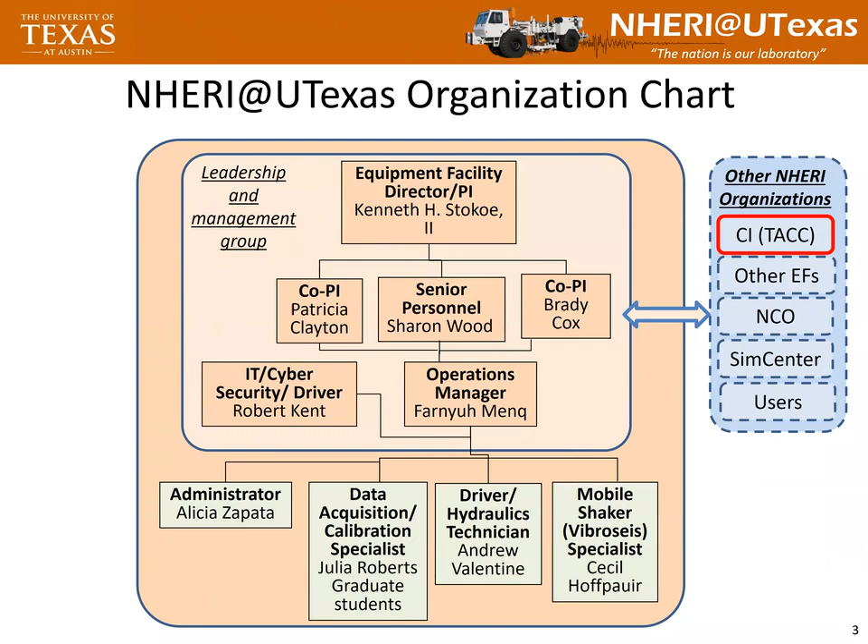I know these slides, but do we really need to talk about them? Do you have anything you want to add there, Farnyuh?

Next please, so this is just to give you a feel. This is our main campus, and this is now called our Pickle campus. Not Heinz 57 Pickles - it's named after Jake Pickle, who was very helpful to the university over his career in the U.S. Congress. We'll leave it at that. That's where we house all of our equipment and build things if we have to, like small sensors that we push in the ground, because we do a lot of that as needed.

It'd be much worse if I were doing that, so let's just be happy here. Okay, go ahead and flip to the next one if you can while you're doing that. All right, so at the Pickle campus - you just went through a whole bunch of slides. I'm a fast talker, but not that fast. Okay, so here we go.

As part of NEES, to get started, we were going to build a building, and then the university saw what it would look like, so they gave us a building that in fact looks worse, but it exists. So we refurbished that - this belonged to our structures lab, and they gave us half of building 46 out at the Pickle campus, and you just see some of our equipment there.

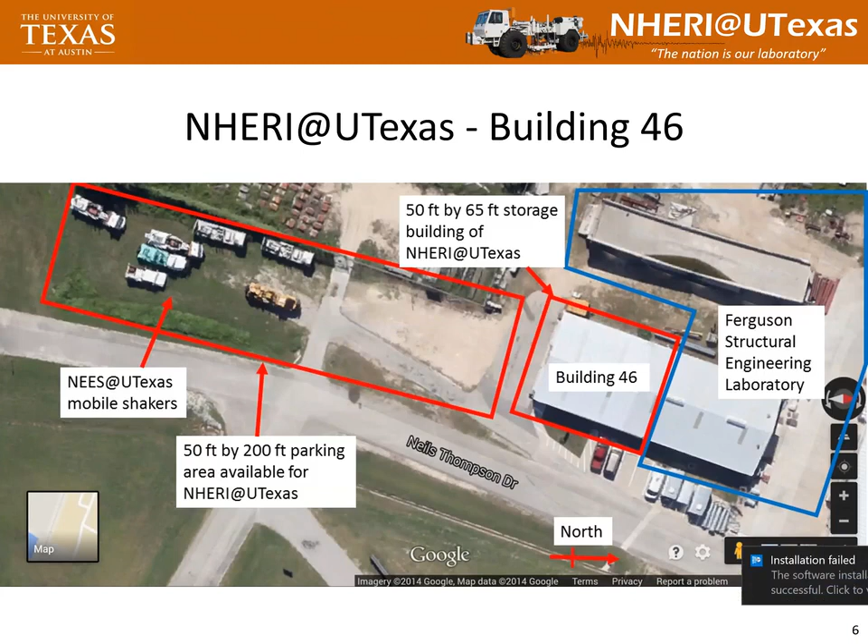That yellowish thing is a different vibe we have for a different purpose. But all of that is ours, and this is paved - much of this is paved now and so forth. It's a very good place, and we have some parking and so forth. Not a big deal, but the university has been good to us in helping us that way.

Next please. Looking into the back of it, there's the RDD, rolling dynamic deflectometer. That's Thumper, and that has to be Liquidator, doesn't it? Unless it's a real old one. It's Liquidator, okay - you'll see what those are in a minute.

Back please - this just shows you a plan view of it. Those are the big doors, and we have lots of space that we've filled up with equipment. This is an air-conditioned one - it's a lock-in container, but this will certainly get to 130 degrees in the summertime.

Here we are at work. That's Cecil, that's Robert - I'm not going to say who's that. I don't know, I know who that is, and I'm not going to say. I took the picture by accident.

But here, all of these things are cables where we built - these are pore pressure transducers. They were 2D, and then we went to 3D with small geophones. You'll see those, built so that we could push them in the ground and shake the ground and measure motions and also pore pressures that might be generated.

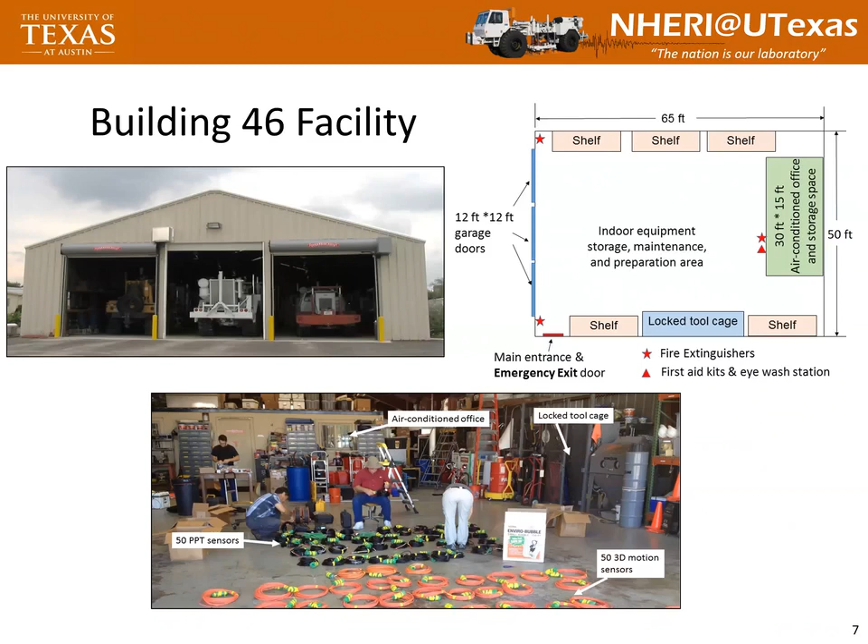Next, so this is what we have to offer you. T-Rex is a triaxial shaker. Everything that's white there holds down that little orange stuff. It was supposed to be burnt orange, but that was the first one made and they gave me a Tennessee orange. But it's too expensive to repaint.

But that's been repainted - how much did it cost, Van, to give? We haven't? Which one have we - I thought Cecil did one. Raptor and Rattler. Okay, I think we repainted one of these, but we won't go there. Okay, but you know, it's all hydraulically operated - there's a big engine in the back to power the pump.

It weighs about 72,000, something like that, 70,000 pounds after new things we put on the back. That's a hydraulic ram that you'll see on the back. Liquidator also has one. There's a ram.

T-Rex, you can push a button and change the mode of vibration. It's probably the only operational triaxial shaker in the world, although the Russians bought 3, but we don't know if they're working anymore. That really makes it very nice when you want to do P and S. You got one machine and it does all of that, P, S and Rayleigh. So that's very helpful that way.

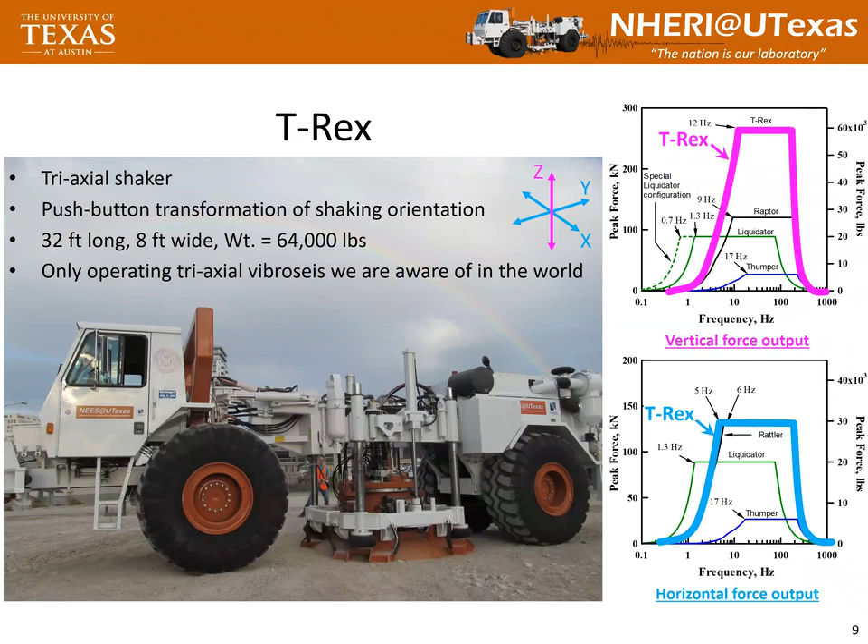Next, this is going to be a video. This shows you T-Rex in New Zealand - this is in Christchurch.

$85,000 to get it there and back. Brady tells me it's a smaller number. It's what, 60,000, roughly 30,000 each way? I like my number better, but okay.

So I misinformed a lot of people. But it went through the Panama Canal, not the Suez Canal - the Panama Canal.

It's impressive when it starts shaking. Brady was using it there to do surface wave testing. In this particular case, we used it for liquefaction.

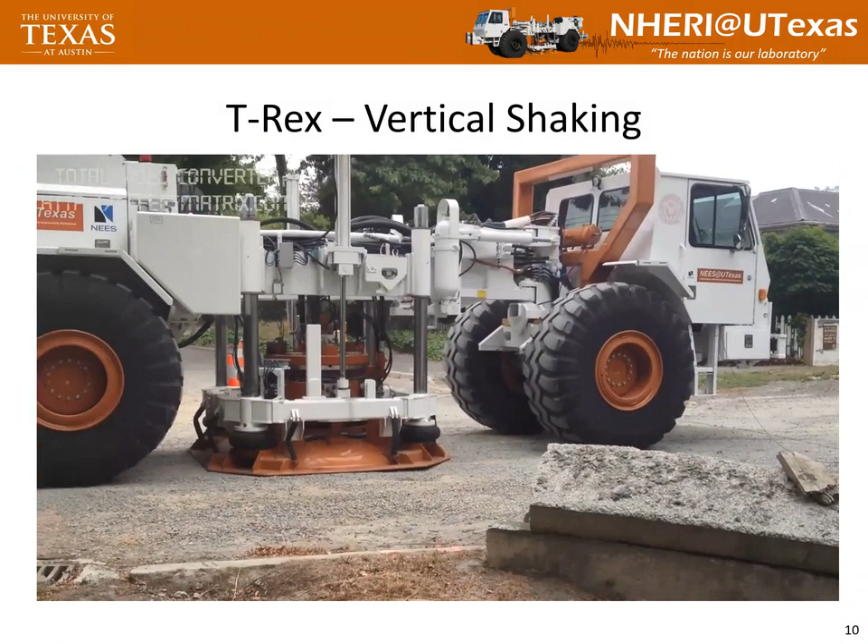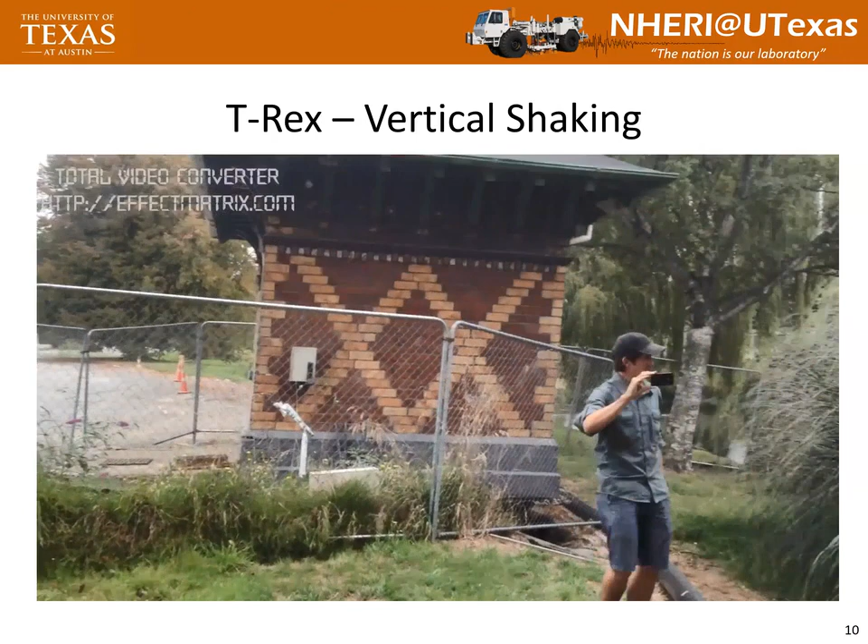There's video with it - it's shaking now. It's hooked up to the internet, so it's determined by how fast the webcast can go. You can see the water going ripples like that - you can see everything is moving around there.

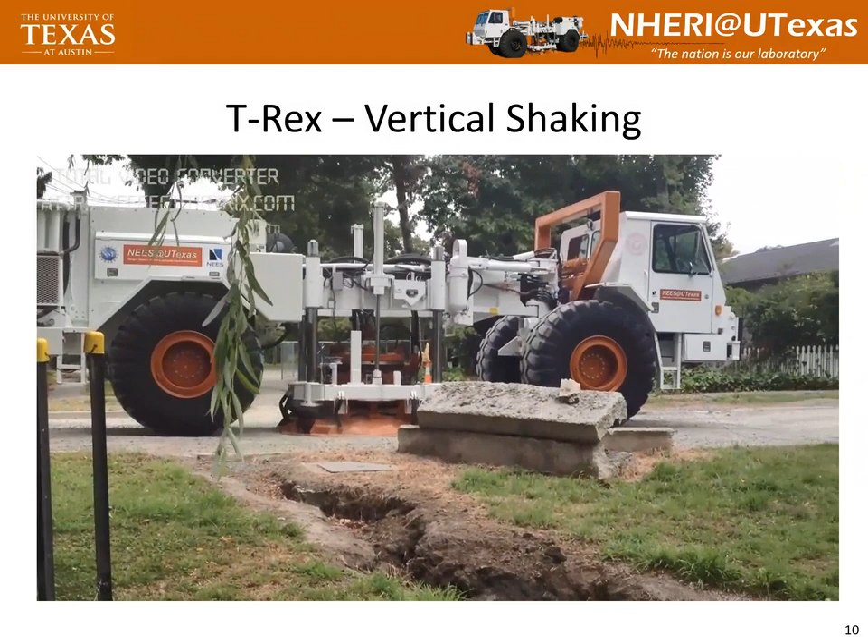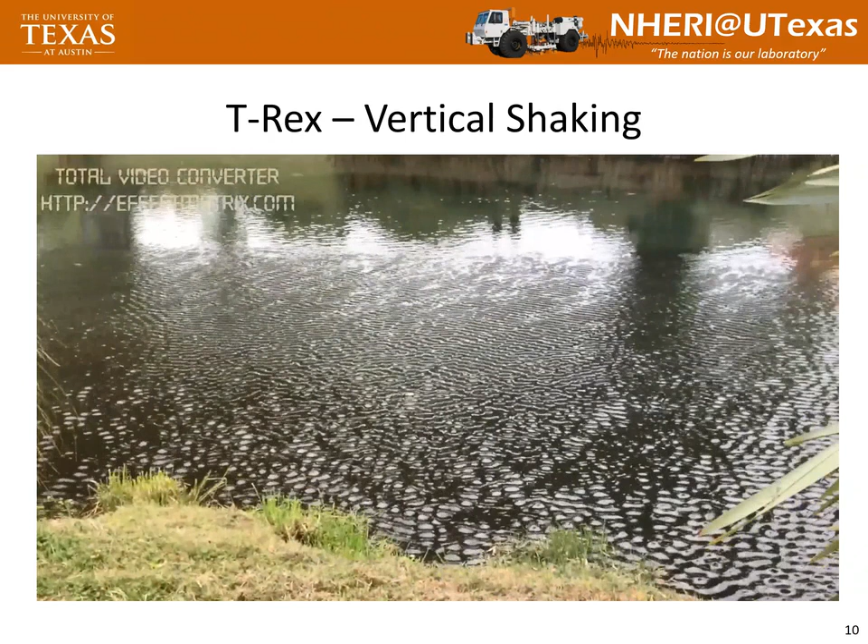There's Robert. I think he goes back again. So we're seeing if we can - yeah, it's impressive when you see what it can do.

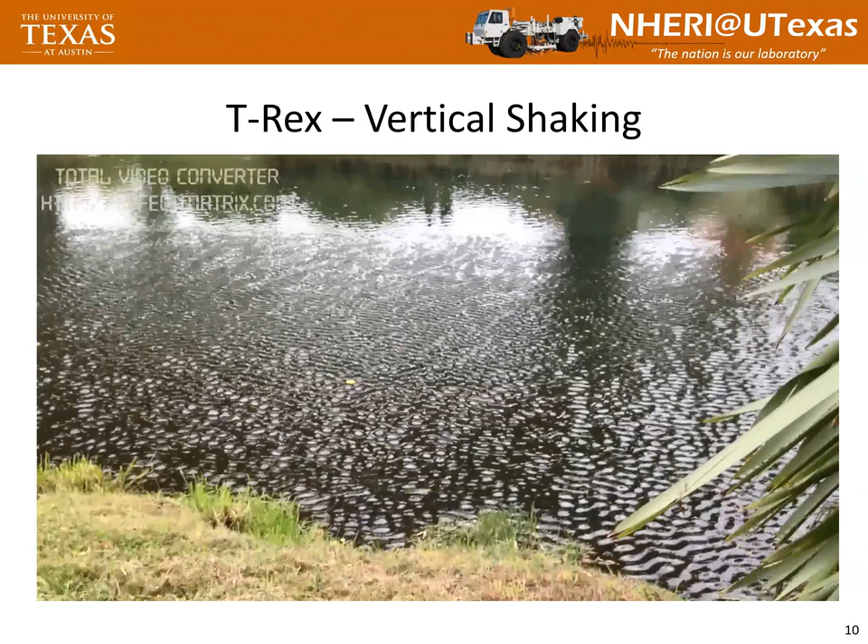We're not putting it on top of a sinkhole. I don't care if you tell me it's a small one or not, just for the record - I'm okay sinking it in a liquefiable deposit, but I'm not having it drop into a sinkhole. Don't you still have some Corvettes in sinkholes here in Kentucky, or did they get them all out? This far north, we don't get them. Okay, good, I'm happy we're here. Tomorrow at our site, most of the sinkholes are pretty small, not those house-sized ones. We'll squeeze Menq down one of them, no problem.

Here's Liquidator on top of Yucca Mountain - but that was T-Rex. Here's Liquidator, it is force limited, not because of the big strokes that it has. So it's got the same output in horizontal and vertical because the machine's heavy enough to hold it in the vertical mode to generate the same force.

What you do see, though, is a special vertical configuration - it couldn't be horizontal, but a special vertical configuration that even takes it down to, do we have it right, Farnyuh? Is it 0.7, more or less? 0.7, 0.6, yeah, something like that.

So we generated a 2-mile long wave with that. We didn't realize we could, so we didn't have our sensors out far enough, and we didn't get a chance to go back and do it again. That's one of those mistakes you regret, but we still got down in excess of 2,000 feet, and we got down to true bedrock on the East Coast - 9,300, 9,500, 9,600 feet per second - and they were so happy.

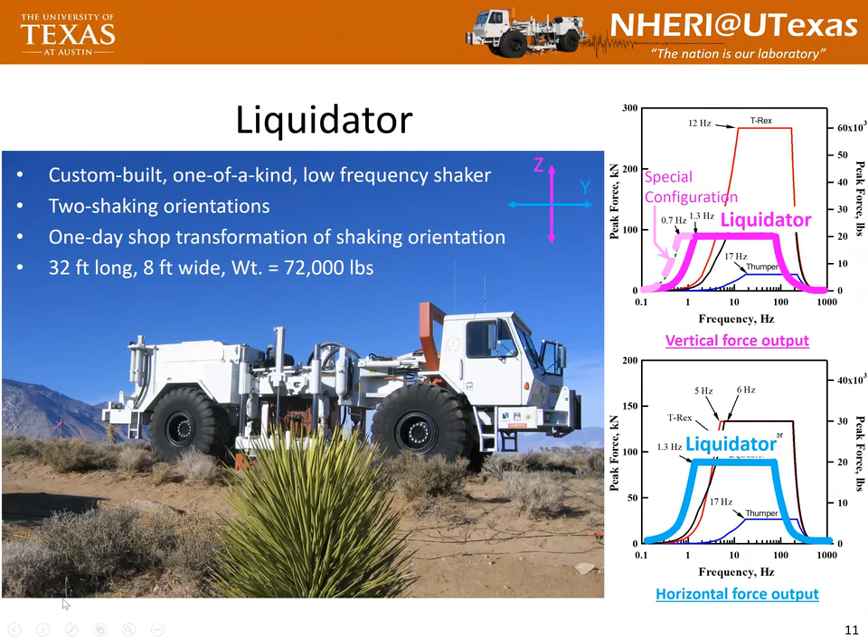Here it is at 1 hertz.

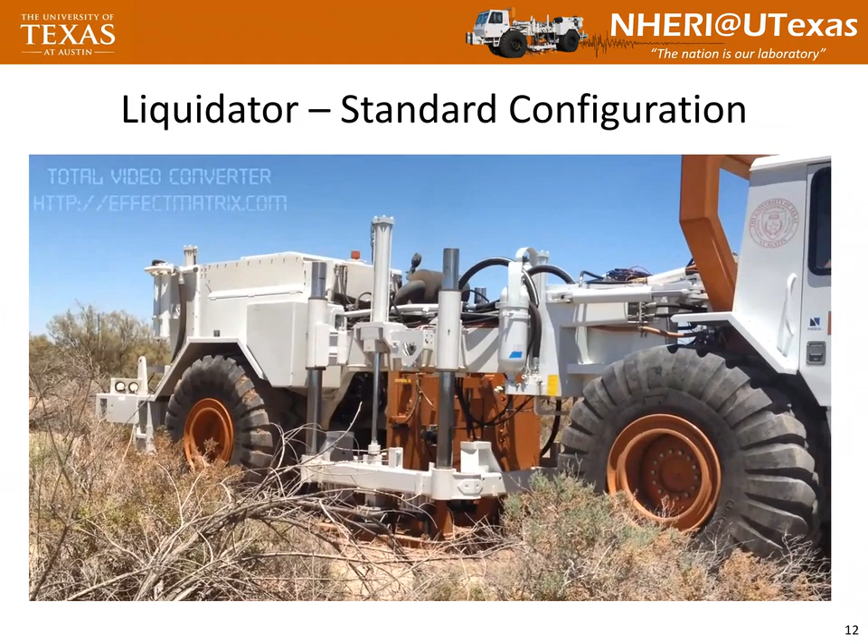Go ahead and hit play, there's going to be a video here that'll show you. It's smooth, but gives you a sense - that's in Imperial Valley of California. It's on the order of 1 hertz, and there the waves would be shorter because it's a much softer soil.

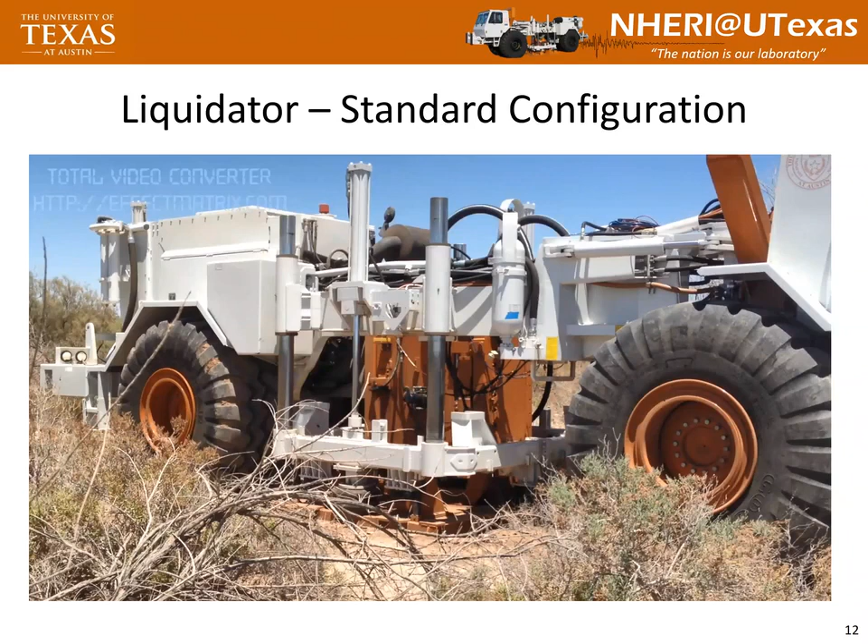So you get a frequency, but you've got the velocity of the soil. In Columbus, Georgia, the soil was much, much stiffer, and the rock is close to the surface. Next, this is a special mode.

Go ahead. Yeah, it's smooth, it's smooth. I don't like this.

So for about 3 years, maybe, I was after Menq. I'm telling him, Dr. Menq, I want to get low frequency. Do we need this? Nah, it'd be huge. Okay, can we do this? And so in the middle of the night, one night, I popped out of bed and wrote down this thought - we'll lift the whole dang body and have the plate not do anything. We have now 55,000 pounds, not 15,000 pounds to lift. So even though it's much slower, we still get good, strong force levels.

Professor Cox was at the same site with us in Columbus, Georgia, and he did his fancy ambient stuff with a mile diameter or 2 mile. Our waves were just as long as his. Now it turns out they agreed, and apparently there's 2 solutions in the seismological area - one says this and one says that - and apparently we're going to debunk one of the solutions, according to Cox. That's as much as I know, but it sounds good to me. And I'm sure there are solutions out there that should be debunked.

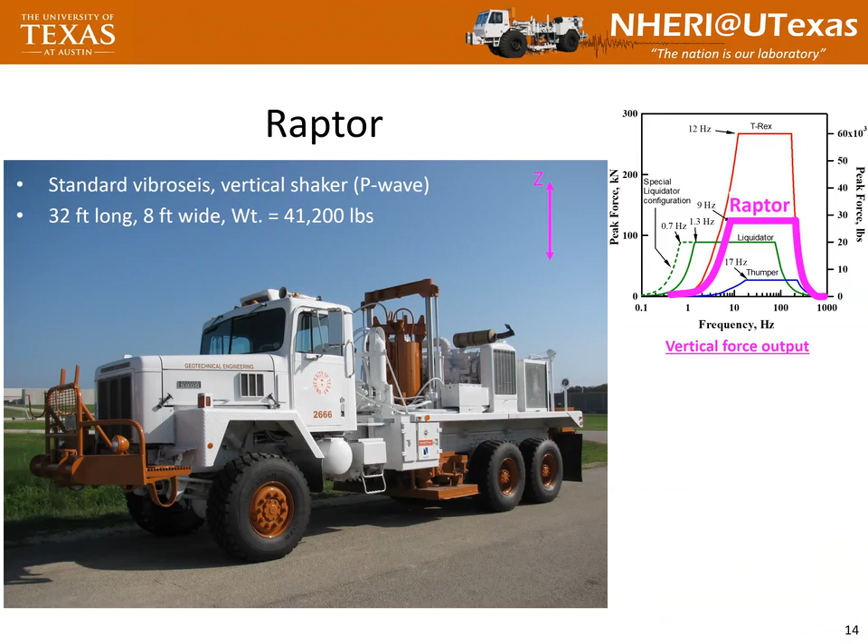And piggybacking - again, all of this data, since it's a funded project, doesn't become available immediately. It's probably a year delay or something like that. But all that data still becomes available, and I'm going to show you, as I already said earlier, some data that's out there that no one has used, and you can see if you have any interest in it.

Thank you. And, you know, Rattler is just a horizontal one. I said that wrong, didn't I? You can correct me when I do that. That's who's going to be out there, because we want two horizontal shaking, and I was doing this, right? But I had this and this. Sorry, I can't do them together.

So there's Rattler. That's what's going to be out there, and we can shake in either a larger area, which gives you more strain, or phase them at different phases together.

Next, Thumper. With Thumper, we just have small amplitude force levels that we can apply. It's on the back here, a little shaking mechanism. You'll see it in another project.

Each one of these shaking mechanisms is built to be taken off—well, not Raptor and Rattler, but the ones that I had built for us—those are constructed so they can be removed from the machine.

Now you'd have to bolt them down or something, and that's a big deal—not trivial. But you can attach them to a structure, and then the machine is still there to power them, and we have a lot of hose. Now you can only have so much hose until you start having a lot of loss in the hose.

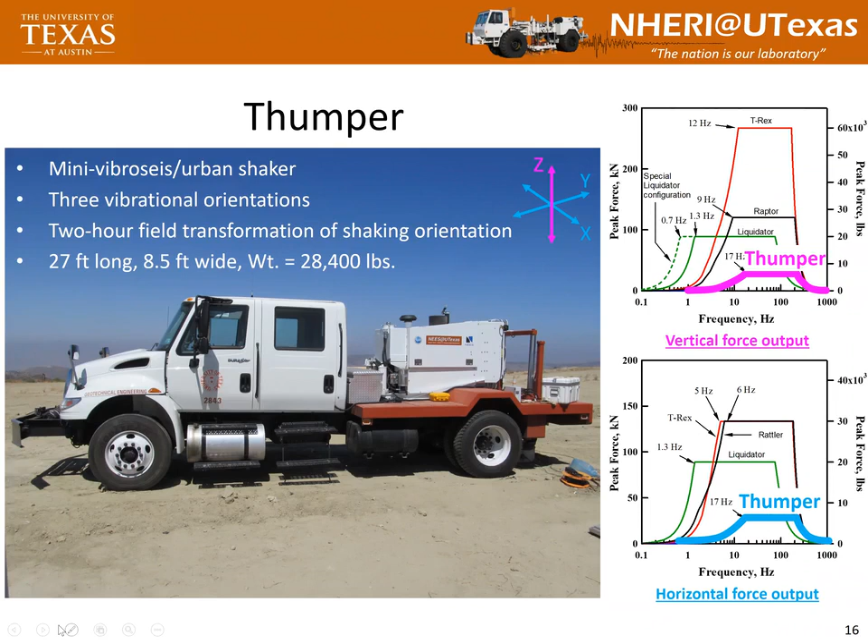Next, please. By the way, if I might interrupt—Thumper, in fact, is the device that's parked in the parking lot right back here. You'll be demonstrating that tomorrow at the site. So, anybody that wants to interrupt at any time, please do.

No, I mean, this is a conversation. It's not meant to be anything but that, to try to help all of us. And that's just a beautiful picture to me—I like a shaker on a 16-wheeler.

It probably is something I didn't even realize that I've dreamt about since I was 6 years old, maybe.

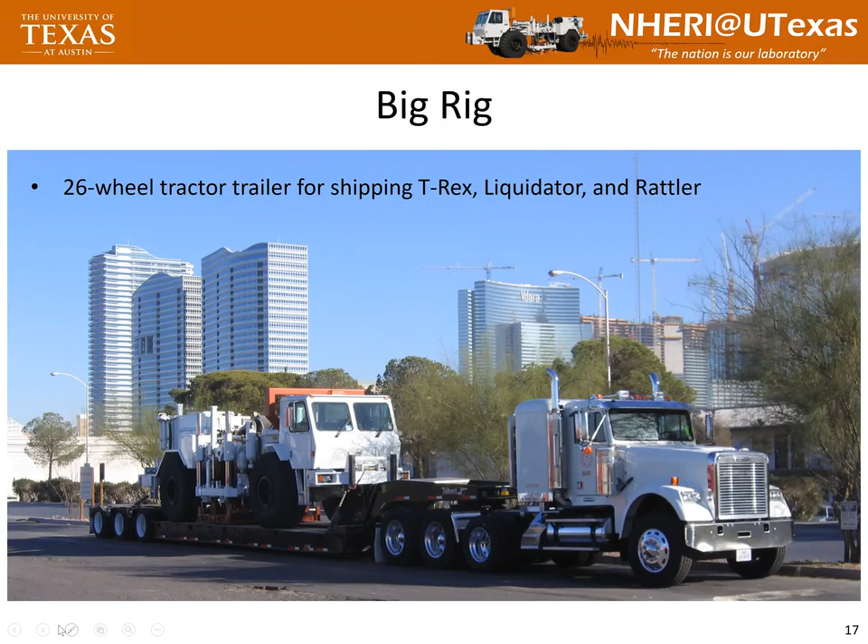Next, please. Again, this is really important to us, that we can send someone off to get fuel while we're still working. Here's a trailer we replaced because the other one was a little too small, blowing tires, or we put too much in it. Doesn't matter which way it goes, we changed it. This one has to be changed now, and that's going to cost us about $65,000, but we think we have program income to do it. Sometimes Dr. Menq answers yes to these, and then I find out later we were maybe a little short, and I'm the responsible party, but we won't go there.

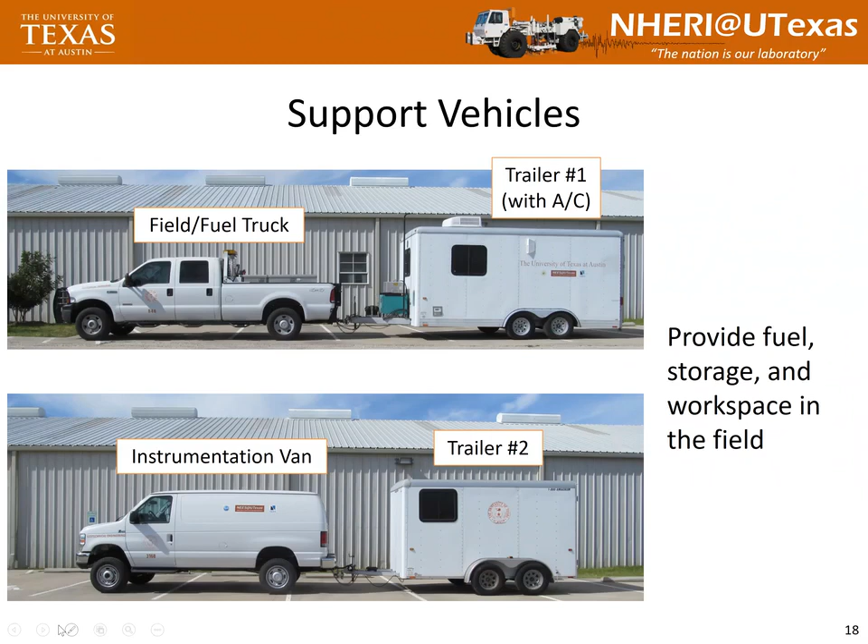We have the instrumentation van too, another small trailer and so forth. Next, there's Professor Cox, younger. In the instrumentation trailer, the one we have now is even a little bit bigger.

Menq can speak to these better than I can. We have a 50 kilohertz sampling rate, 64 channels of this data physics, 24-bit, up to 200 kilohertz sampling rate. I know various folks have tried to replace these with National Instruments, and they can't compete yet. I'm sure someday they will, but this is still first-rate, 136 channels of data acquisition, and that's a big deal.

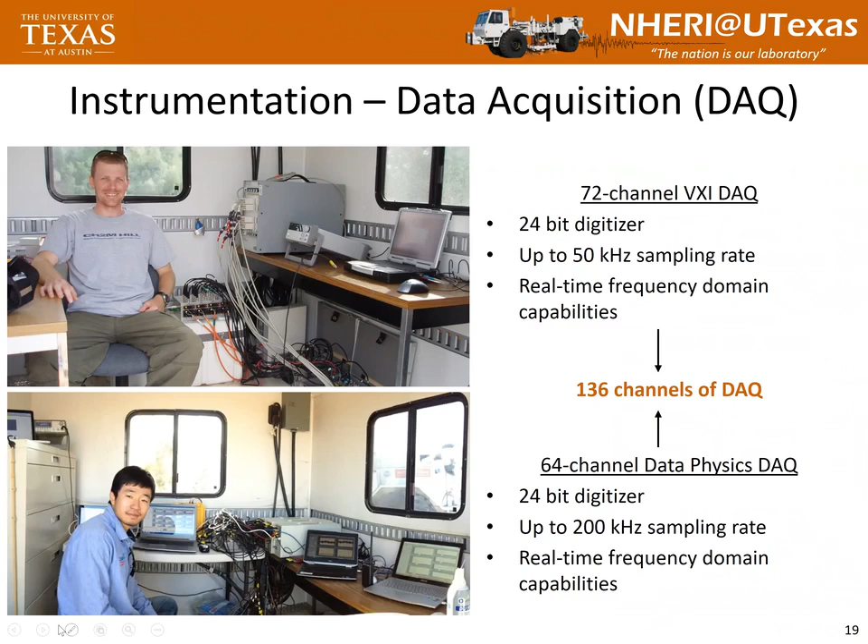Next, we have lots of sensors, 1 hertz because of surface waves and the things we like to do, vertical as well as horizontal. I don't know if you know, they would sell you these as 3-component sensors, and we bought a couple, and it's just not good, let me say it that way. The way they couple them, they have natural frequencies that generate in the system you're recording with. So ours are all separate when we're putting them down.

What you see also, just for the record, let's say we were doing this on pavement, but this is even in soil. That's a little base we've developed, and Ivan Wong and others have given us good ideas, so we're happy to take good ideas. It's spherical shaped, so you can set it on something where you have it, and it's got a nice strong coupling with it. You can feel that, huh? Then you put your sensor in, you get your level, and you can adjust it, and it levels up just like that. Whereas if you're out in the field otherwise, it takes much more time to get the darn things placed and leveled. So that's been very helpful to us.

Obviously, this is Professor Cox, because I don't have all those takeouts, and the cables we develop, we'll have them shielded the whole way.

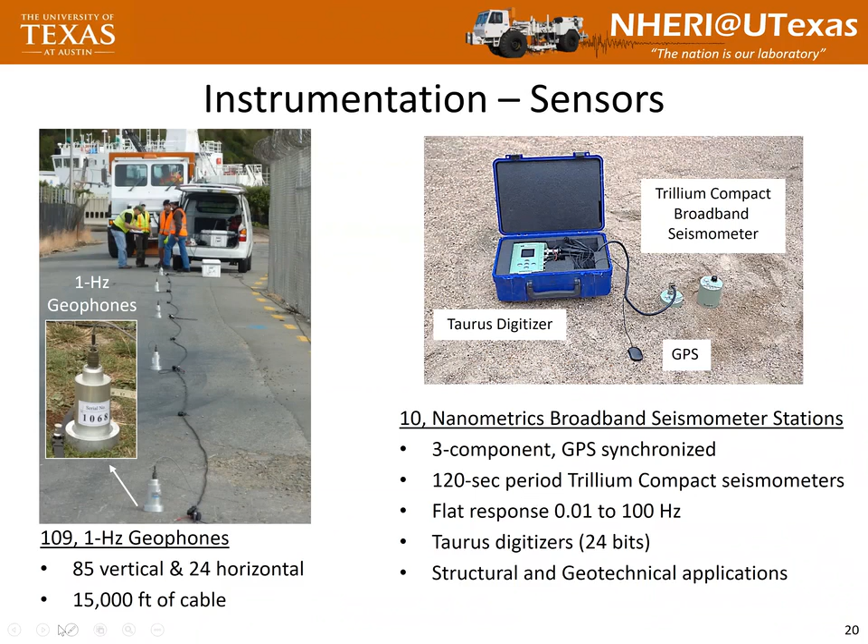Next. Again, we have cone penetration sensors for you. So you talked about those. I think this little one is not going to let you push in just any old place. It won't go in gravel either. But these are a bunch of Fugro cones, pore pressure transducers, things like that.

And I think that cost us about $40,000 or $50,000. 35? Gee, every time I've given numbers, I'm exaggerating, aren't I? That's right, that's right. When I talk to Florida DOT, the numbers are getting bigger.

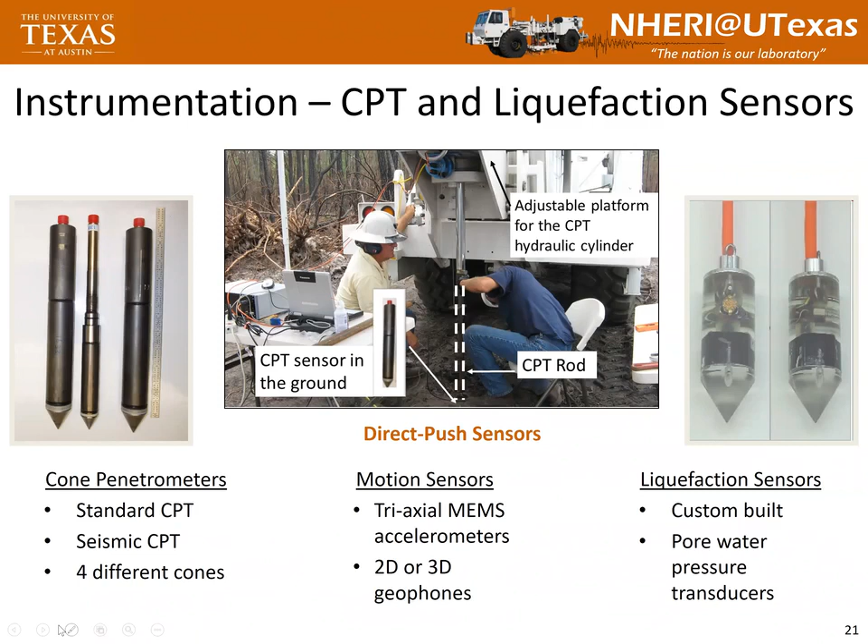One of the very first projects we did was with Simon Klemperer from Stanford. They had all the Texans, as they called them at that point - those were 4.5 hertz phones. That 3D standalone, battery operated equipment, spread out all over the valley, with T-Rex going to shake in different areas.

That data is available too, isn't it? I don't know how good it is. IRIS is really good about helping you, and training you on some of those things too.

They basically have librarians for the data. You're free to say more - you'd be happy borrowing from them, but you need to do it in advance. There's not a pecking order, it's just busy, and you have to see if you can get yours in on time. You just have to work ahead of time, that's all.

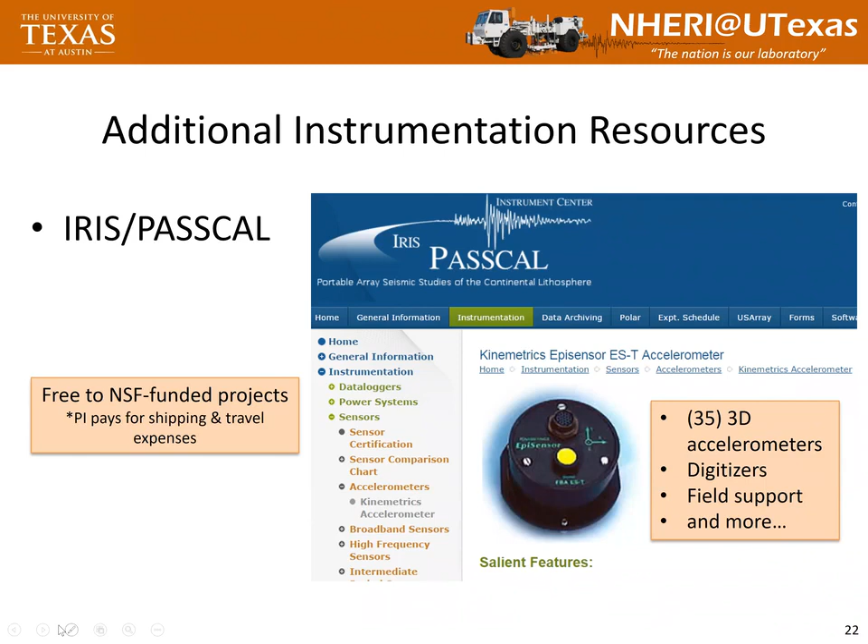And Christchurch, New Zealand - that was really a very special one.

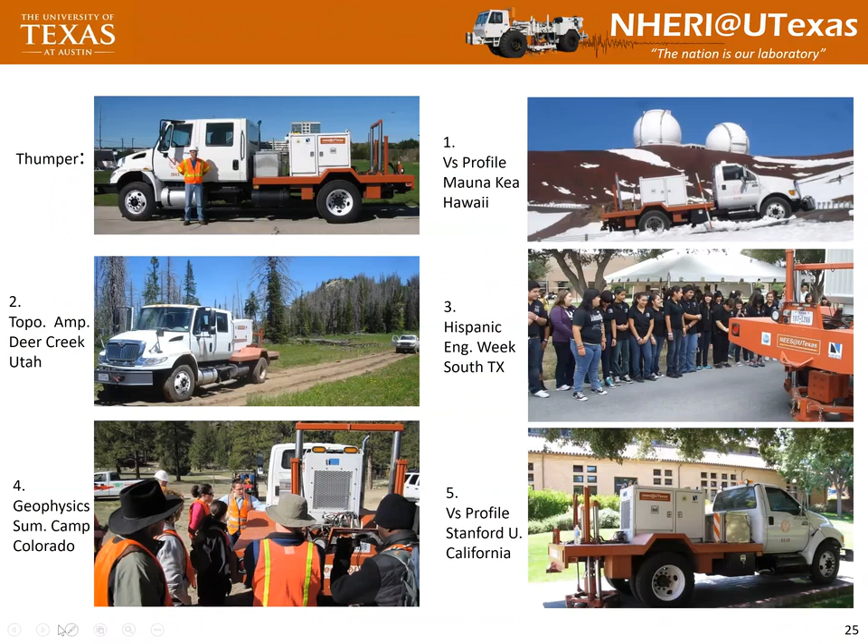And 20 minutes to go, okay. And I really had some interesting things to say there, but whatever.

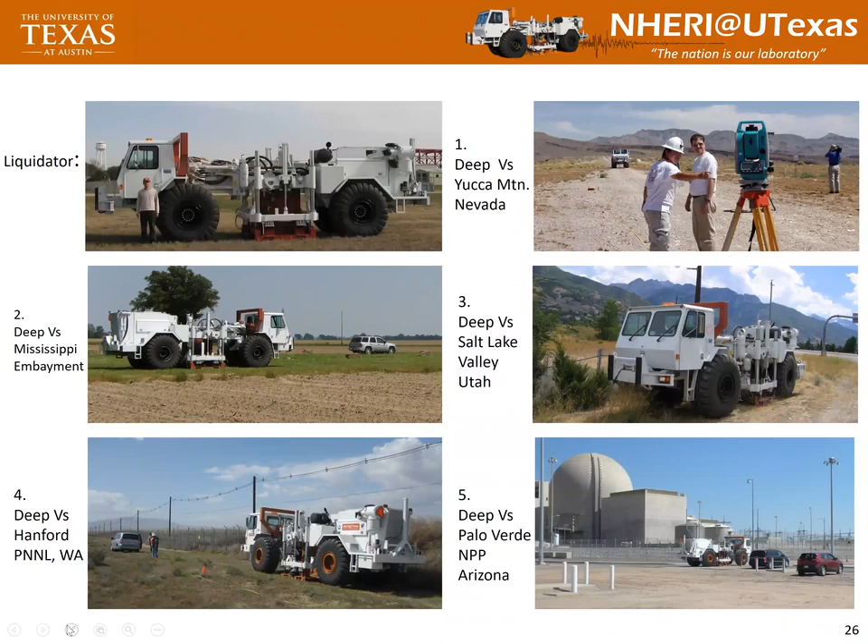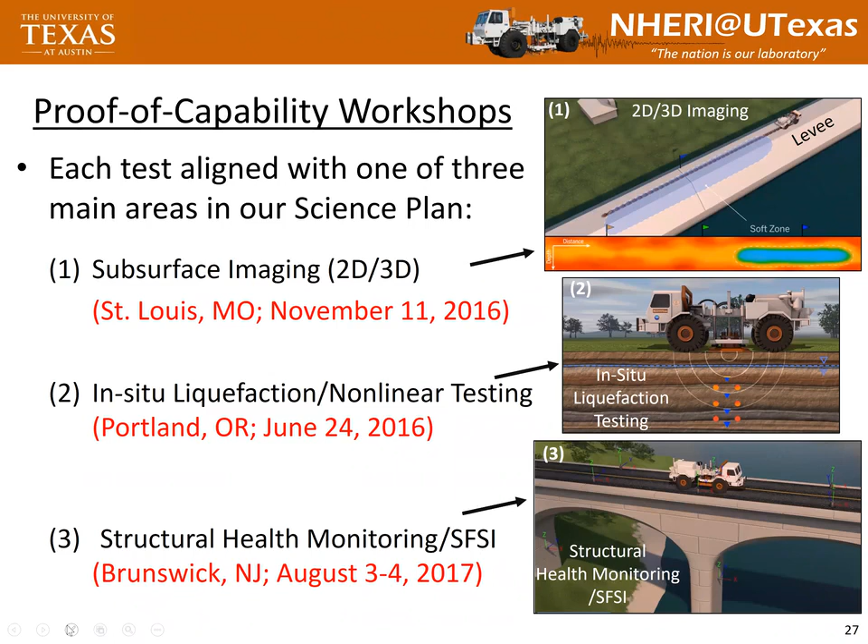This is the proof of capability workshops. We put this in our proposal because if you don't hear about it, you just can't read a little something and get a sense for what's going on. Most people sit behind a desk and don't get out in the field, so you don't have a feel for what you might try to do. We had a very nice liquefaction workshop out in Portland as our first one.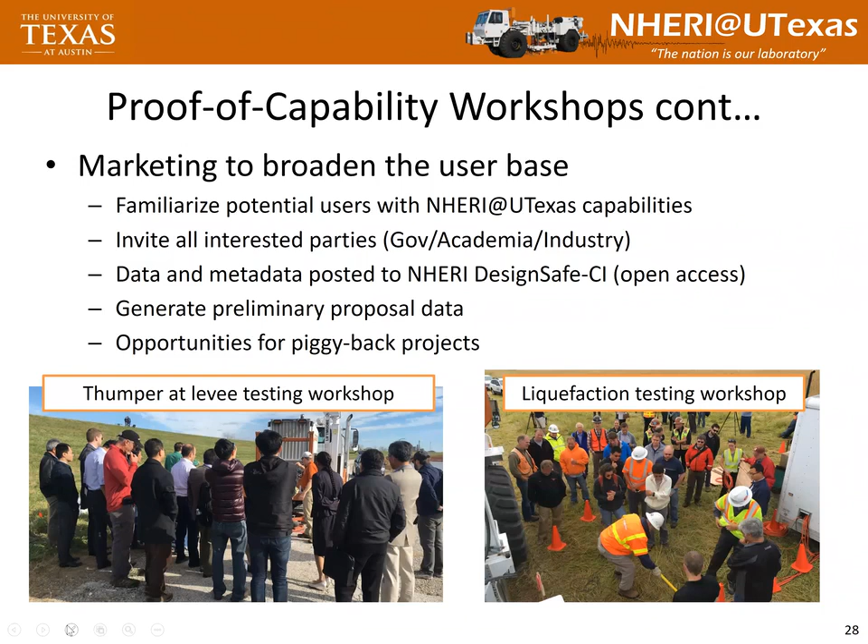In our science plan, that's higher resolution 2 and 3D imaging. We need to do that. Now, that's in the program. That's not us doing it. That's us trying to get things ready so other people can do it and we can work with them.

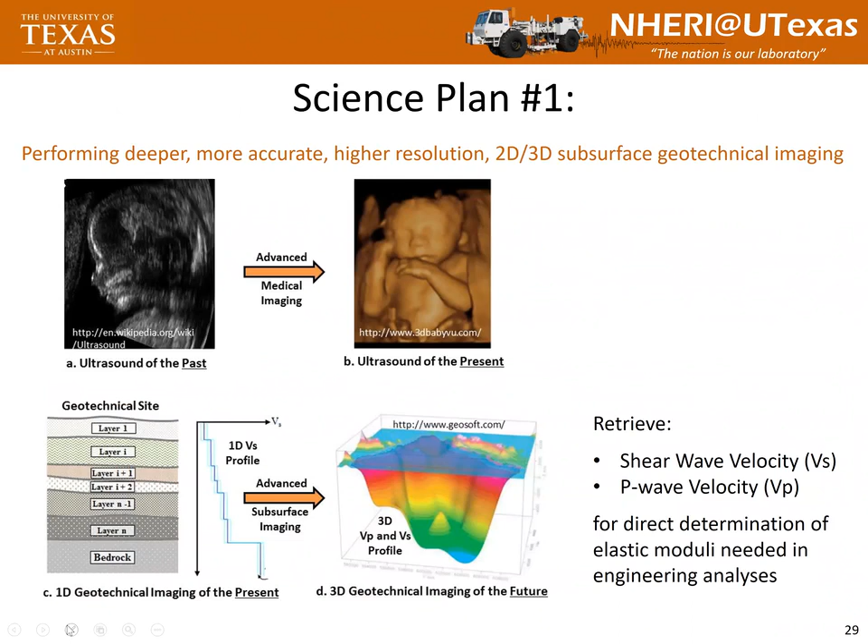This is Brady's work. It was a rapid, so that's a small amount, relatively speaking, $200,000 or less. Then the New Zealanders, for our liquefaction rapid, contributed another $800,000 in the end because it was working so well that they kept going. But this was not known. That period at the site was not known.

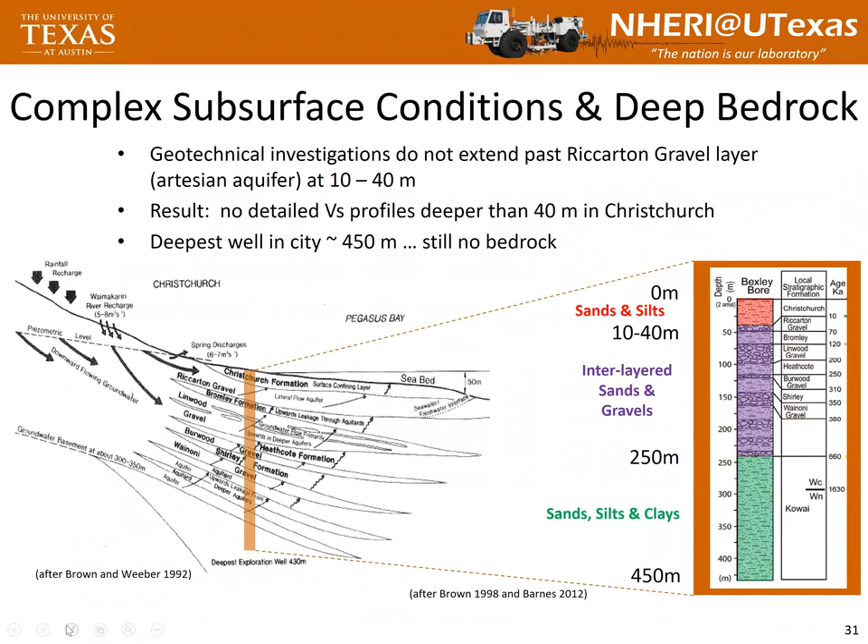Before that time, if you need to correct me, go ahead and jump in anytime. Here's a profile, and they were down in the top 40 meters at most, I think. And the deepest well was 450 meters, and they still didn't run into bedrock.

Brady went down there, took T-Rex. Really, it was both projects that worked to get T-Rex down there, but it was used down there next. One of the big costs was all of the moving time. We were there for a couple months, and just having the truck come and move it from site to site turned out to be really expensive.

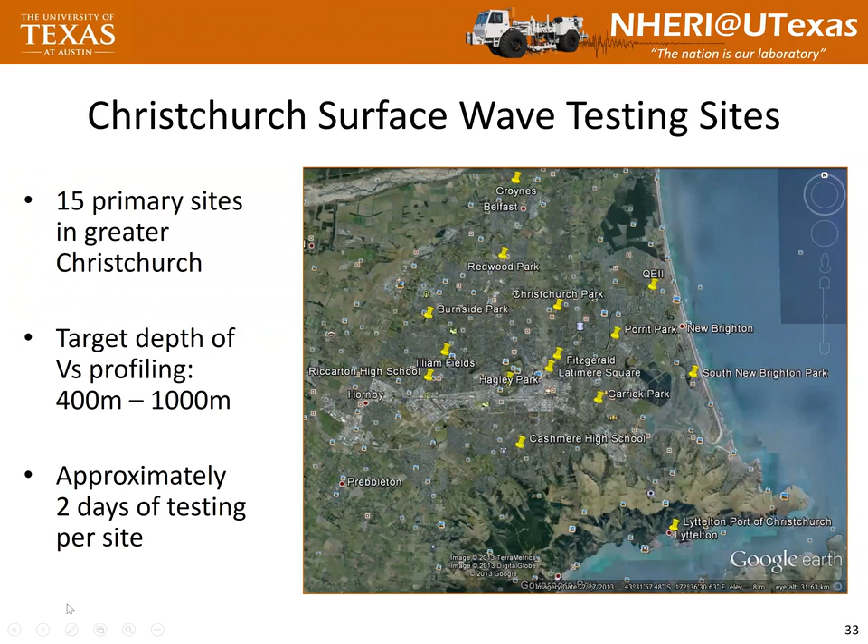So 15 different sites. This is the Christchurch area. Is this Queen Elizabeth II? Do you remember that, QE2? Yes, this stadium? Yes.

It underwent, in fact, I think you see a lot of sand boil material there. But you can see there's an active source. The circles would be the passive source, and the different arrays. So the active and the passive were combined.

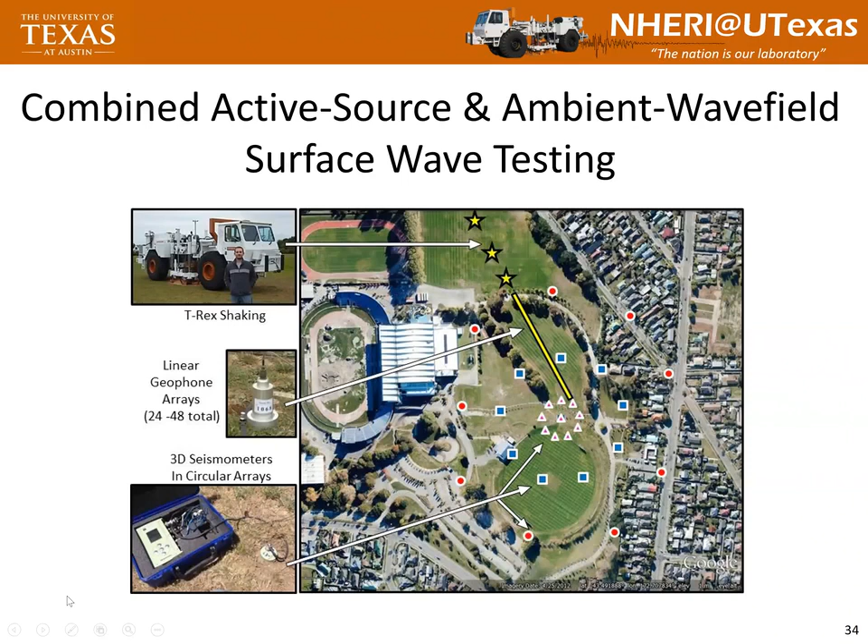I remember Brady coming in my office and saying, well, they think it's bedrock. Do you have any equations for gravels? You betcha. We proved to them that gravels could have that velocity down at these depths. Now, we've never been down at those depths, but our equation said that's what it would be. I feel strongly those are good equations. This also shows work Brady did on the supercomputer as possible solutions and uncertainty associated with the different solutions. So that worked out very well.

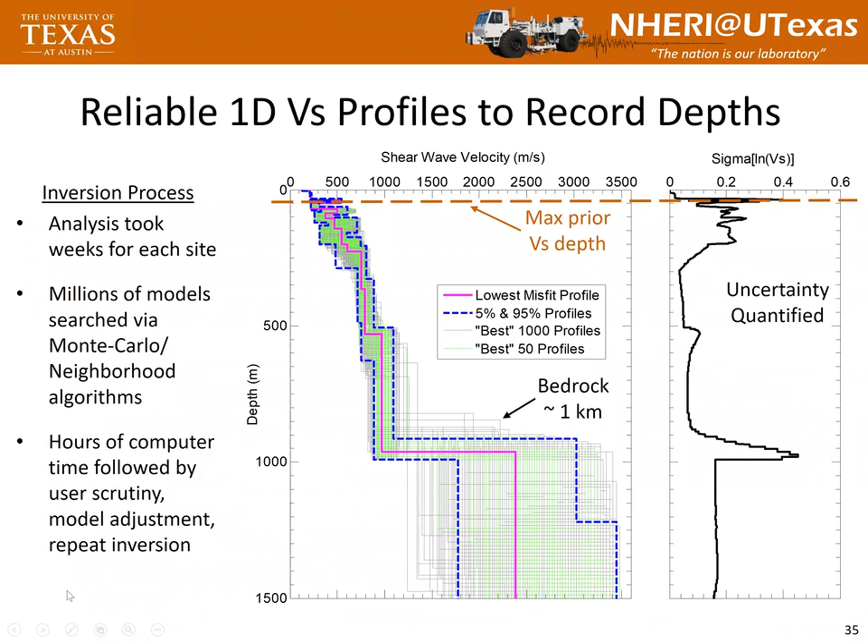In fact, I'll ask a question - anybody that knows the answer, I would love to be educated. How does Poisson's ratio vary with strain? Who wants to go first? Yeah, we don't know. We don't know.

We have run, of course, what seismologists typically do. This is G log gamma. They have constrained modulus log gamma do the same thing, meaning Poisson's ratio is constant. We have done this with T-Rex on a different project - this is G log gamma. Now we can't get out but about to 0.08% strain, so we're not going to high strain, but we're going out there.

In constrained compression, looking at the plate, if that would be the modulus - sorry, I didn't mean it to go down so much. That's what constrained compression did. The modulus, the Poisson's ratio, if you defined it that way, is not constant. But we didn't get very far along before the military took my PhD student away. He got his degree, but we need to get it to do this.

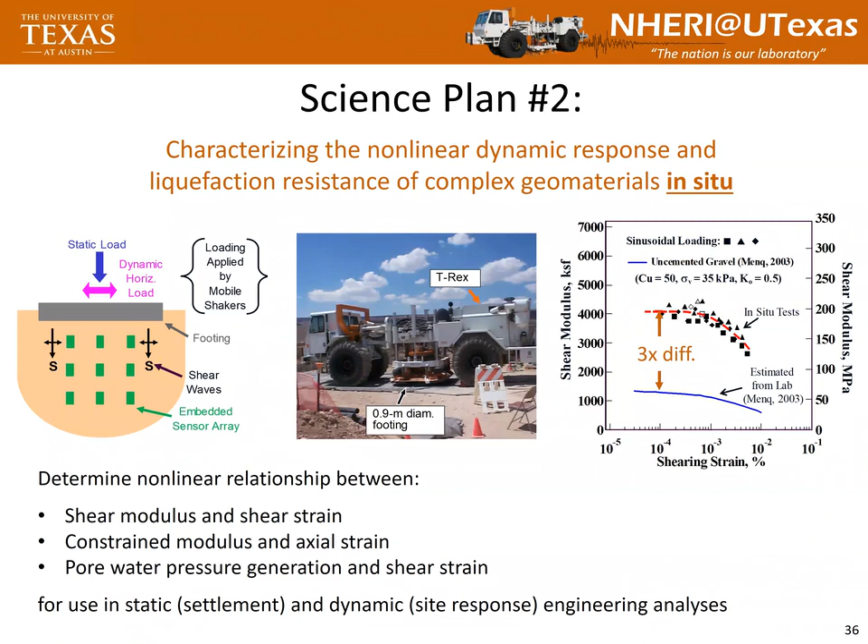They had no idea how stiff the material would be, so they used shear modulus to calculate the modulus of the soil—in terms of how much it might deflect as you loaded it, it's very stiff. They could use that and didn't have to go any further. It wasn't near failure at all in this slab, but they were designing it and had nothing to use before this. They were very pleased.

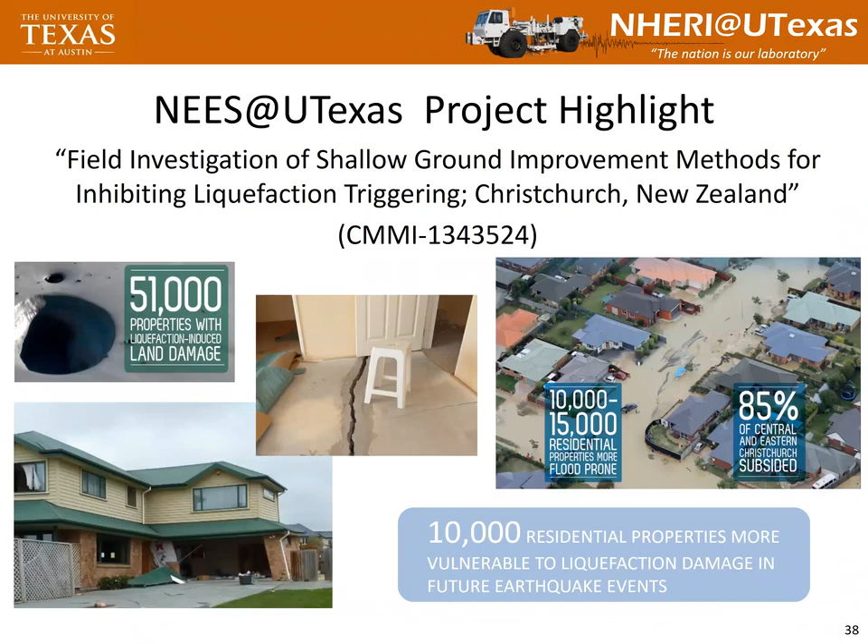They were doing shallow ground improvement, trying to make a 3-meter thick layer.

Does that mean I'm 10 minutes overdue? I mean, have I talked too long, or do I still have time left? Okay.

Rapid impact compaction—that just means beating on a 1-meter diameter steel plate with a ram and compacting, trying to get the top 3 meters, maybe 4 meters, densified.

This shows rammed aggregate piers. The way they were built, they're built with just coarse gravel.

This shows low mobility grout. Those looked a lot like that. Yeah, that would do that. No, the low mobility grout didn't actually look like that, but that's okay.

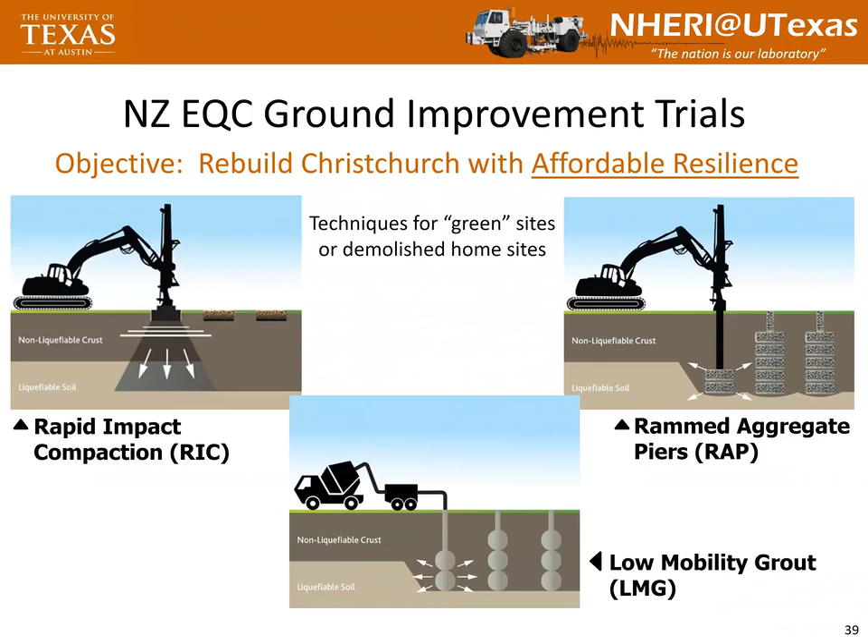So don't worry about these—that's not what they actually look like, but that's to indicate here's the rammed aggregate piers. We would put T-Rex on top.

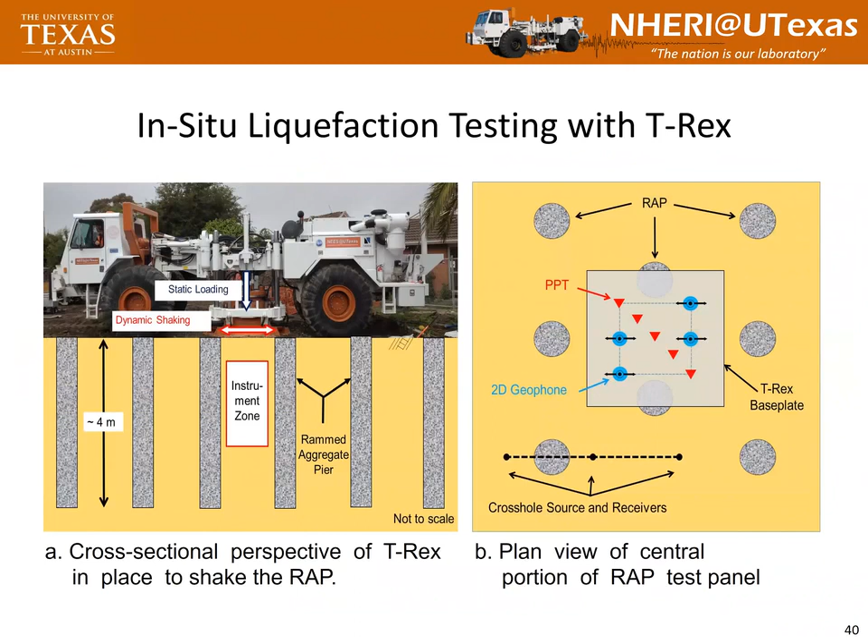First we would install sensors, and then we'd put T-Rex on top the next day and shake. There are the piers. Those will be pore pressure transducers, and those are 2D geophones to start out with. Then we'll just shake and make measurements.

What happened? Here we go. Ah.

We don't have—okay, this is the head of the... we don't have a volume, do we? Okay, well he's saying that they have problems and so on, and we're trying to thicken the crust.

No, he's a very, very nice person, by the way. Very nice. This is Sjoerd van Ballegooy, who's really good. There's Professor Stokoe, who's nervous.

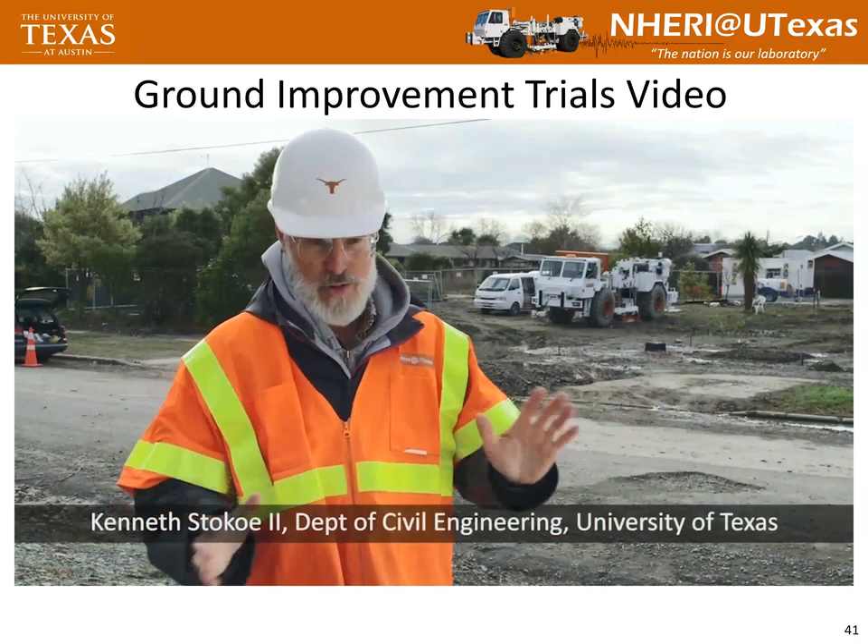And he's—oh look, there's a downward going shear wave. Wait a minute. There we go.

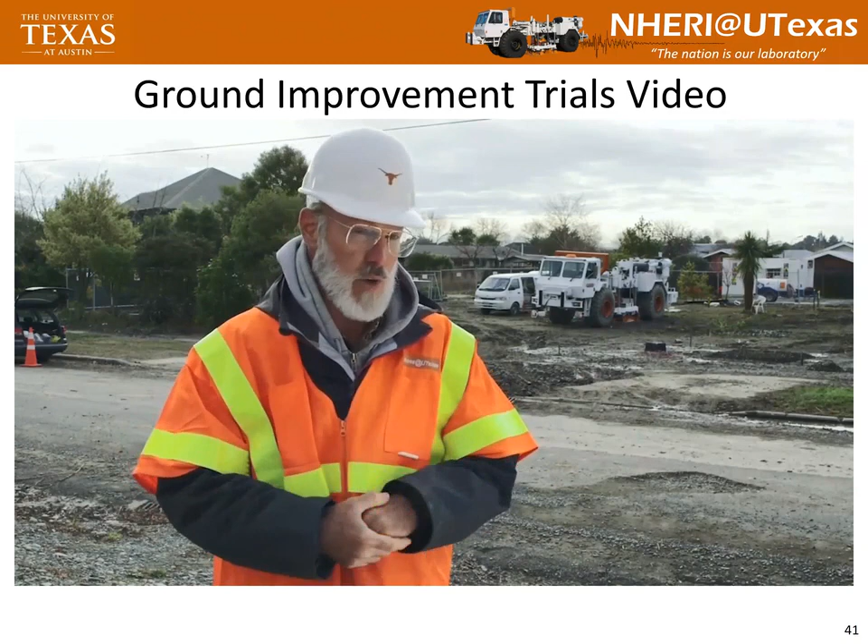And there's T-Rex over there. There's our field hunk of junk—that Volkswagen wouldn't necessarily go forward when you put it in first gear. No kidding, but we survived.

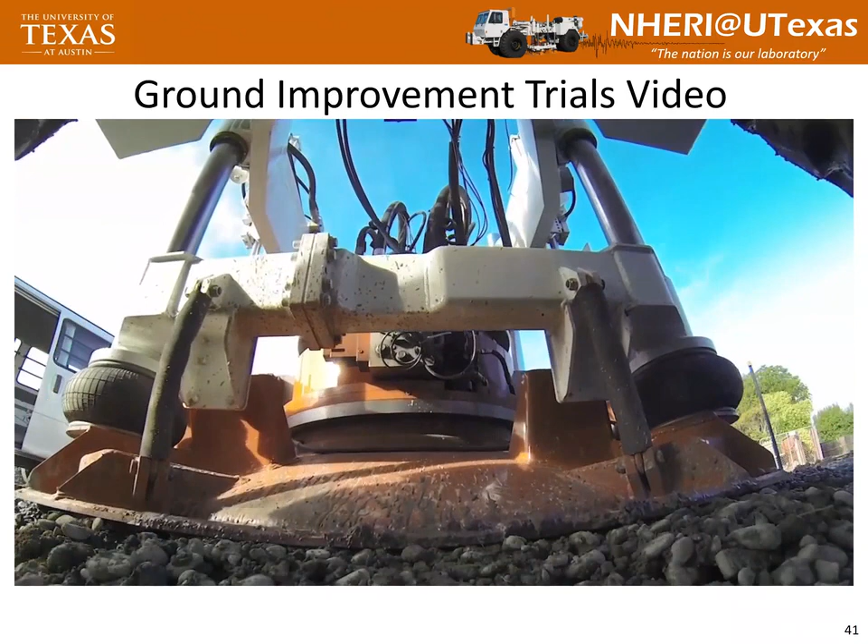So we're setting up—oh, liquefaction right there. Where is it? There it is. It was just a little, not really—just some localized rain and the water popped out of there. We couldn't really get it to liquefy.

They were very happy, very happy. The consulate, the ambassador in Washington D.C., wrote a letter about this, and the University of Texas to NSF—they were very happy with what we did down there.

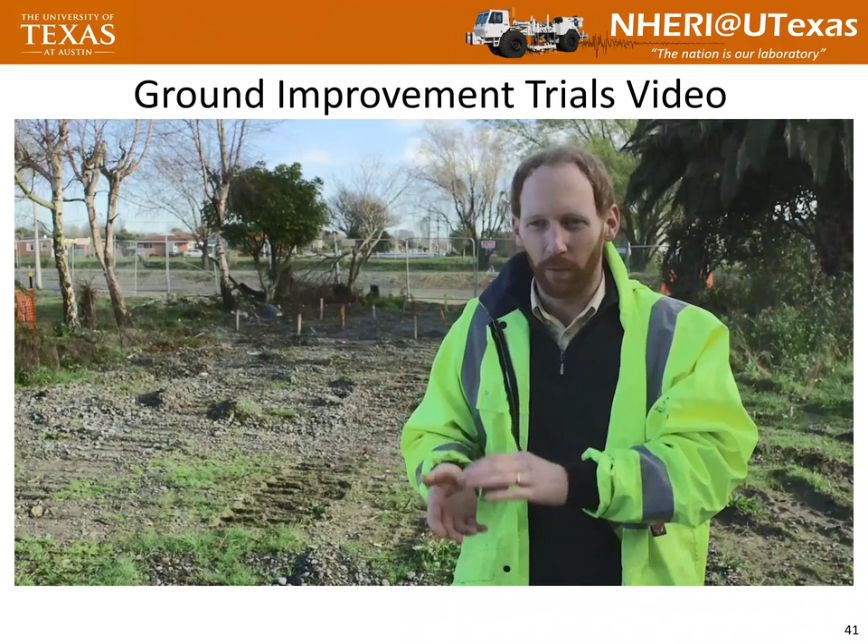Can we pop to the next one? Absolutely. Okay, and this is just shaking around buildings and bridges.

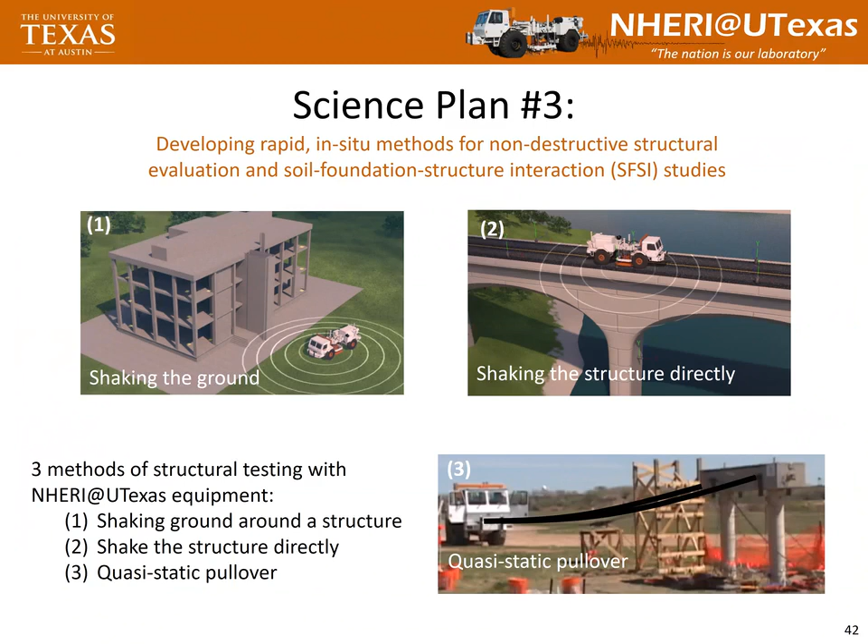And see, there's one of the machines—I think that's maybe Liquidator. See those cables? There'll be cables, and we'll be pulling stuff over. Because—go ahead.

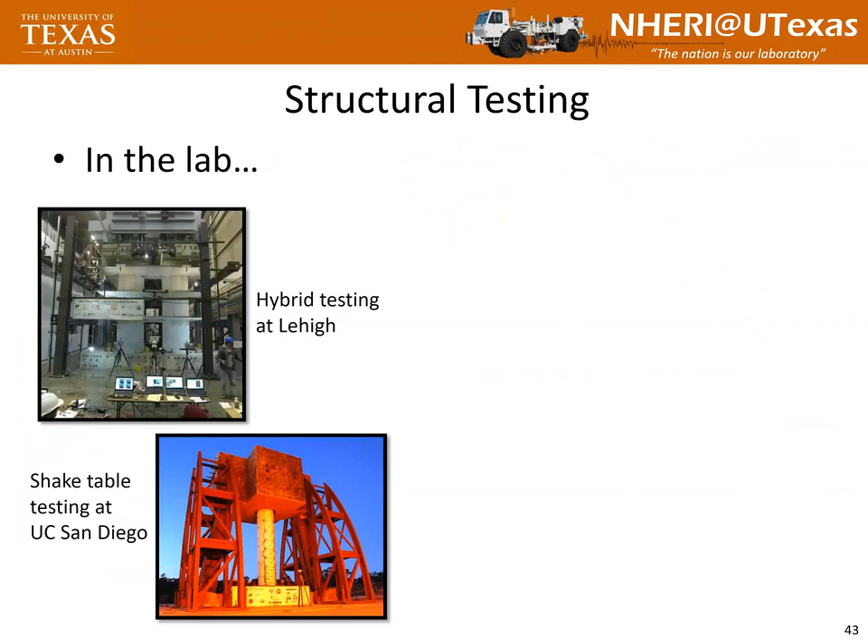The idea here is that structural guys can test in the lab, but it doesn't really represent the field and the complex conditions there, so you need to go test in the field. We're trying to convince the structural people to do that.

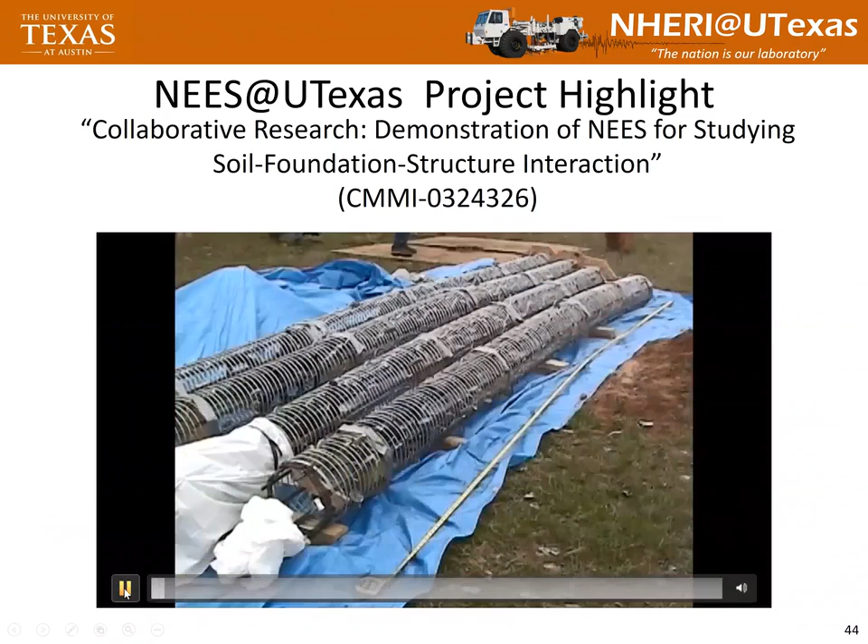Okay, this is a video that's important. This is Sharon Wood—this was our first project before things really started.

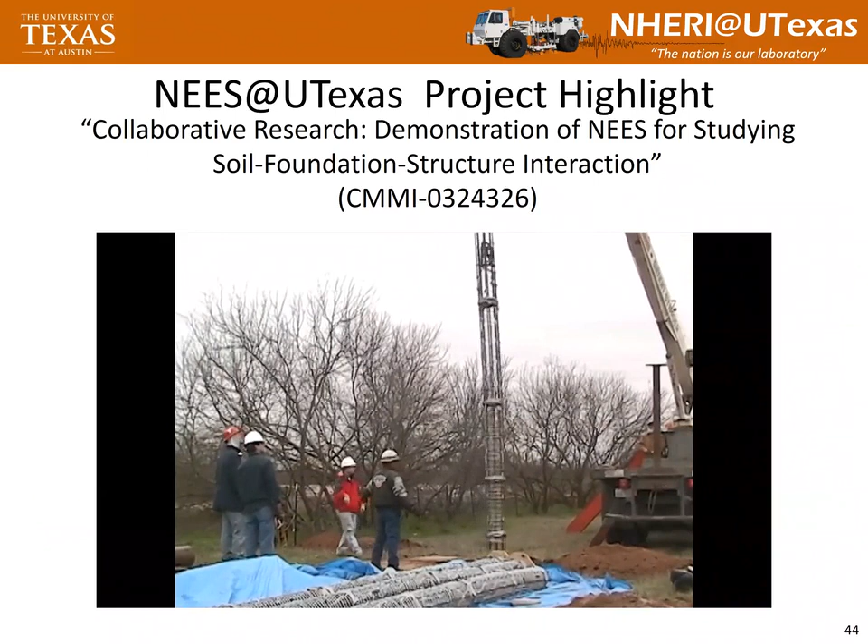We're building quarter-scale—using the term 'we' loosely—drilled shafts and a bent on top of those that represents a real bridge in California.

And we'll be shaking those. There'll be a bent that's taller—this is the taller one—and you'll see over here a bent that's shorter.

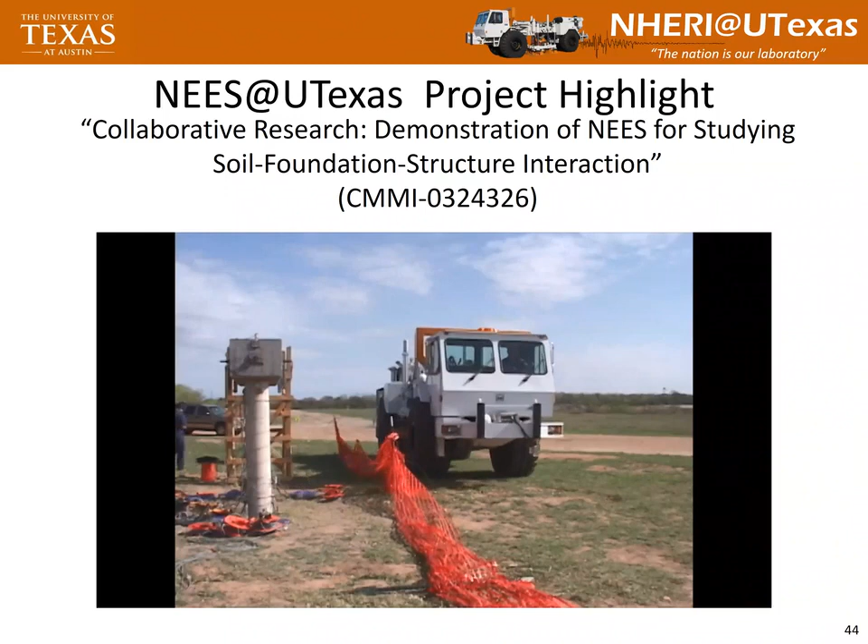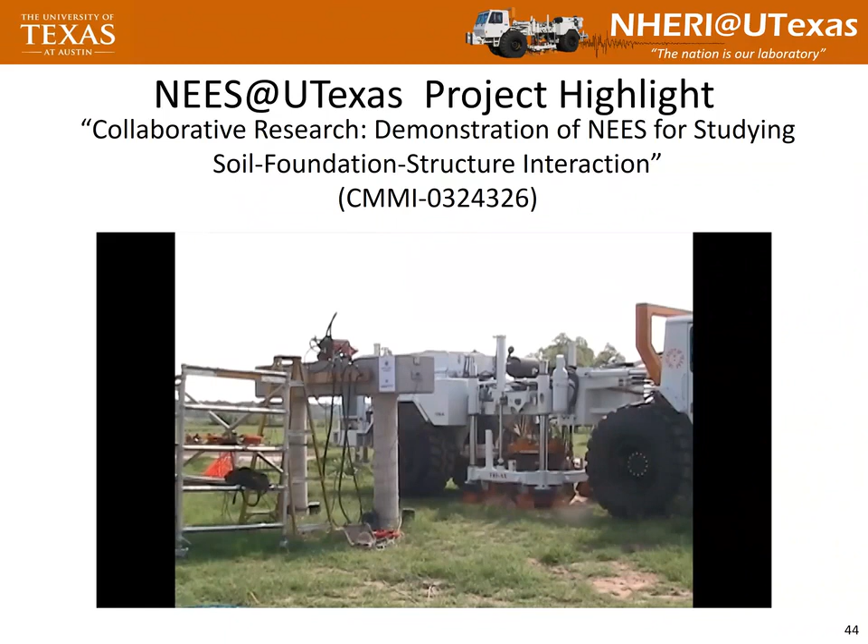And you'll see there's T-Rex, the shaker, right there. We're just—you can shake, as shown in one slide, in all directions around this bent to see how it responds to different earthquake motions, vertical and horizontal. That's just horizontal shaking in all kinds of locations around it.

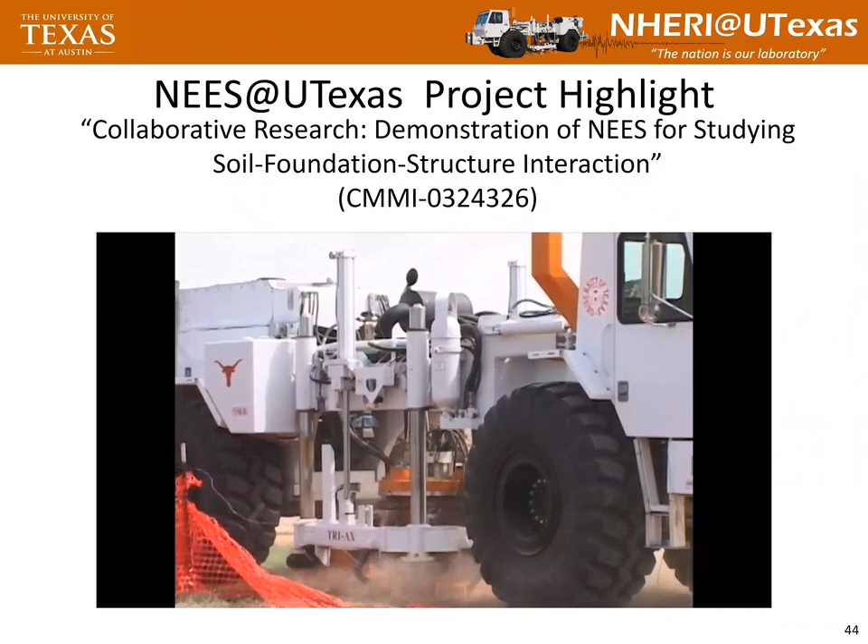Okay, now there's Thumper—so it's taken off the truck and bolted to the top of that.

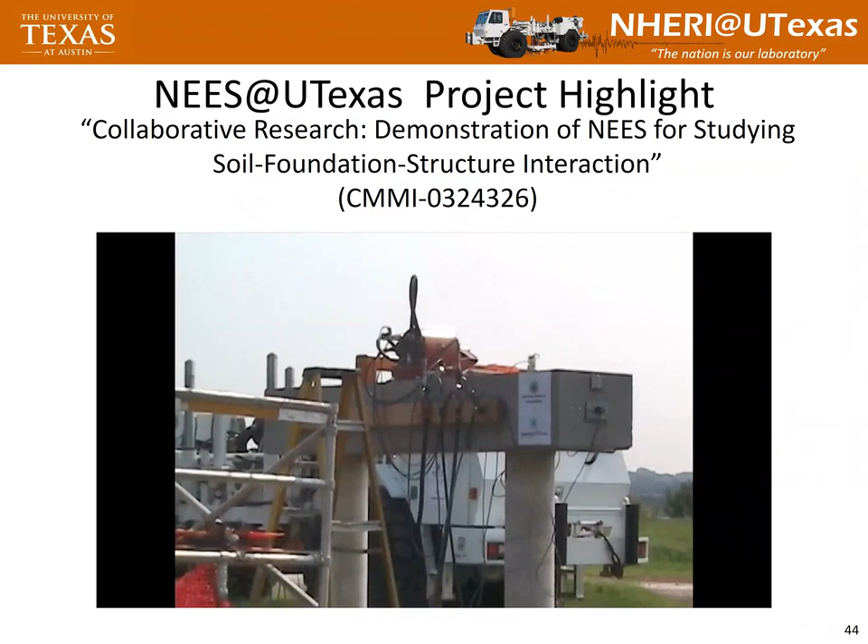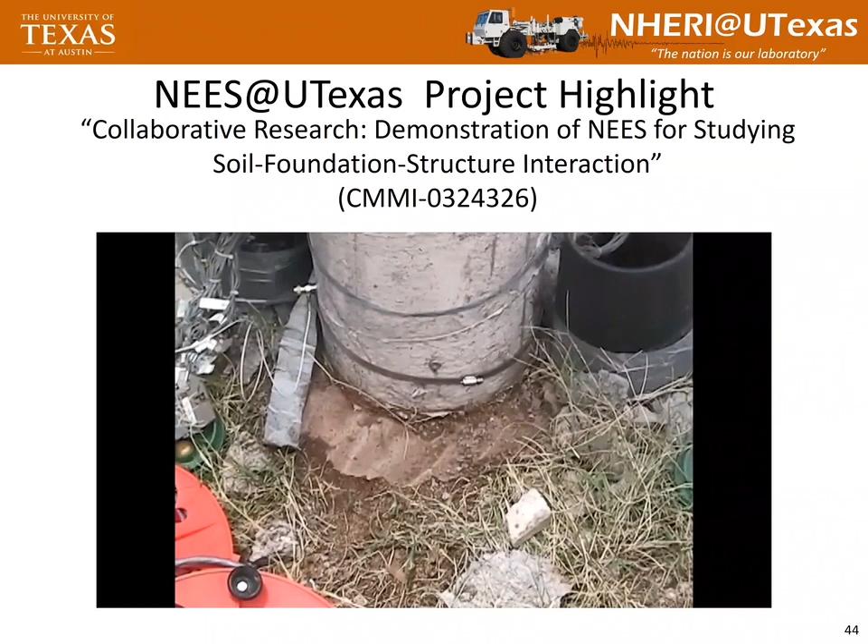Now, you probably think that such a small little shaker can't do anything. That's a quarter scale, that's not tiny. It's even gapping, okay? We'll get more gapping when we start pulling on it. But it was causing a little bit of cracking in those. There's a shorter bent compared of the two bents.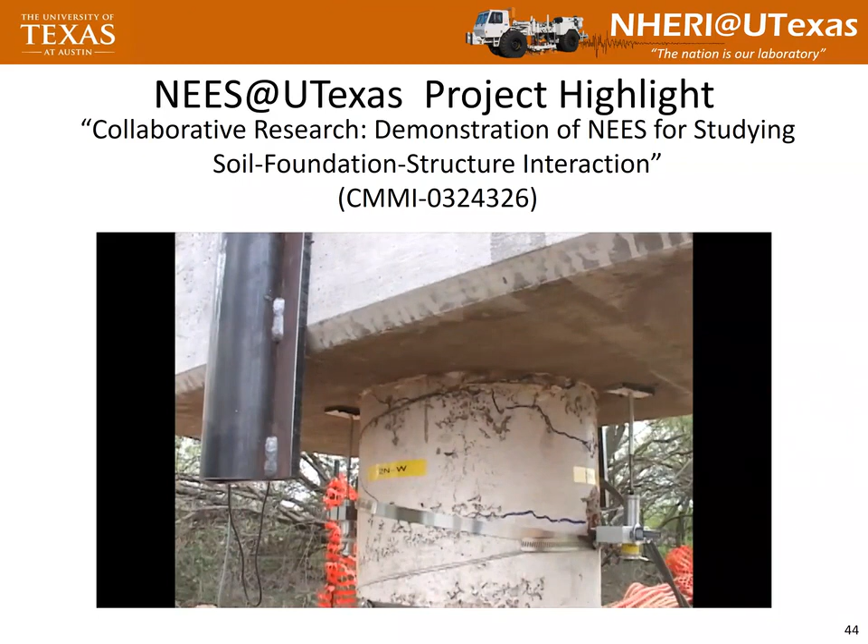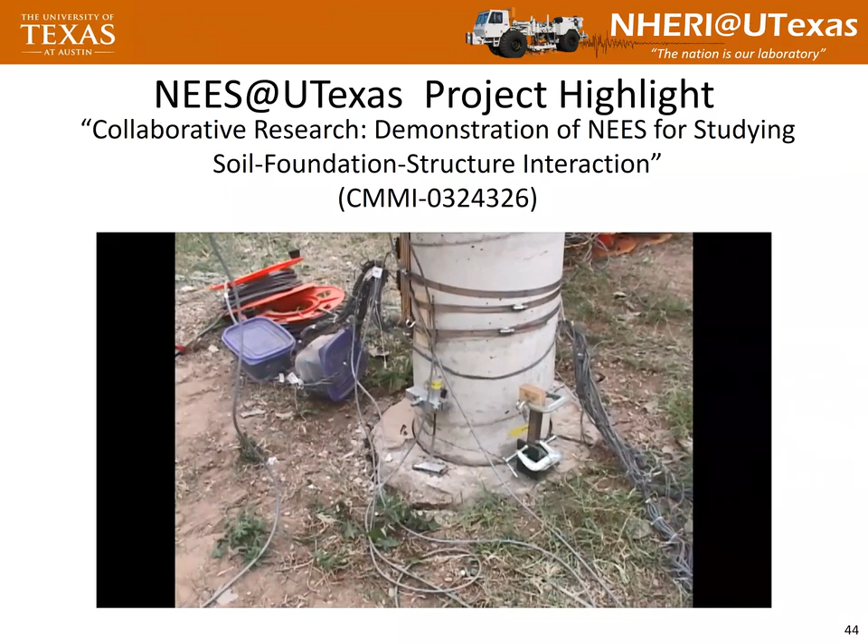Now we're pulling because one of the guys at Davis, a nice person, I won't name him, said well this stuff doesn't do very much for us. Okay, what do you want us to do? So we created hysteresis loops under these conditions, and it's cracking. I don't think anyone, even the guy who wanted us to do it, has used the data. I think all the data is there waiting for one good PhD student or two to analyze it and come to the next generation of how things are going. So you tell me I don't do enough cracking, huh?

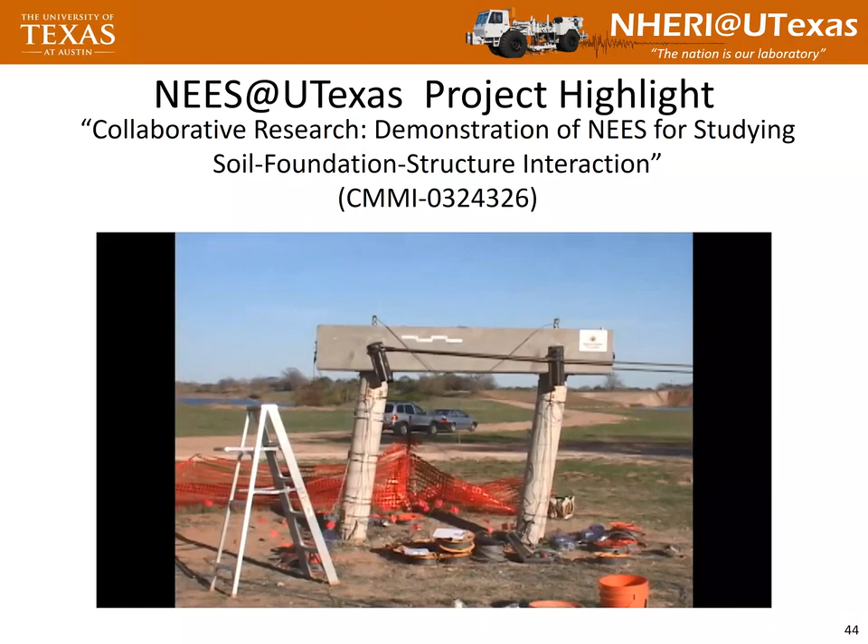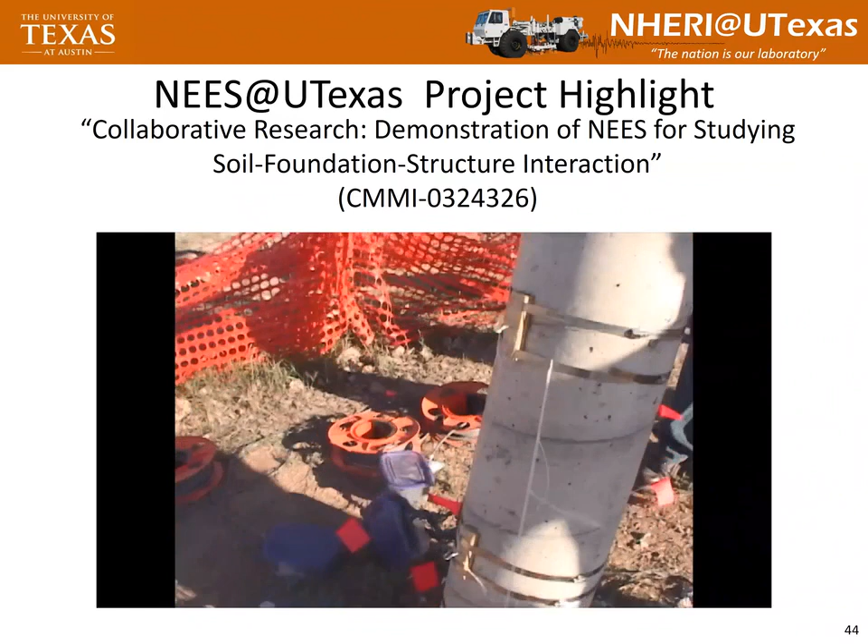I'm talking to the guy now at Davis. I mean, don't worry, we'll do more. But we did back and forth. You got two machines, so you can do back and forth, it doesn't just have to be one-way loading. And that was easy.

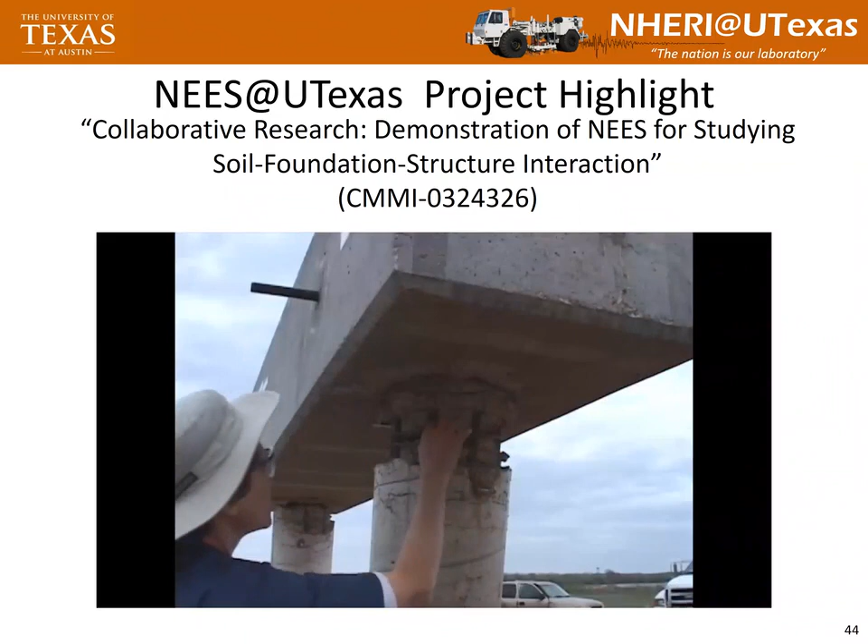I think that's Sharon, by the way. That's Sharon Wood right there. Is that Ellen Rathje? That was Sharon, wasn't it? Okay, well, straighten it up.

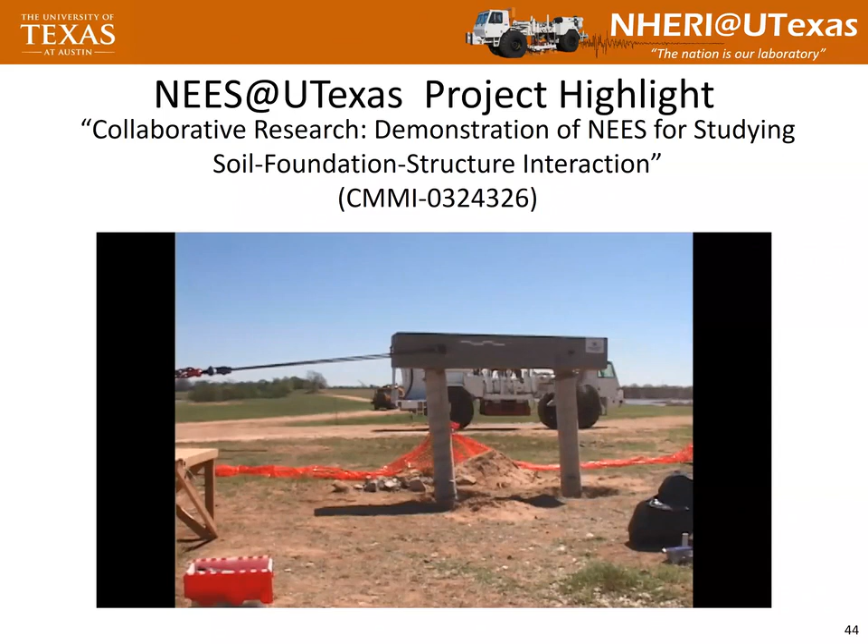That's just the winch powered by the hydraulics on the machine. The machine's got the brakes on.

I think the structures people have a lot there to use. This is just saying, okay, the thing you always think: if you can put known forcing functions at different points around the bridge, that's got to be a lot better than just ambient, looking for localized defects in the bridge. Remember, we went down in smoke, but that's what we thought.

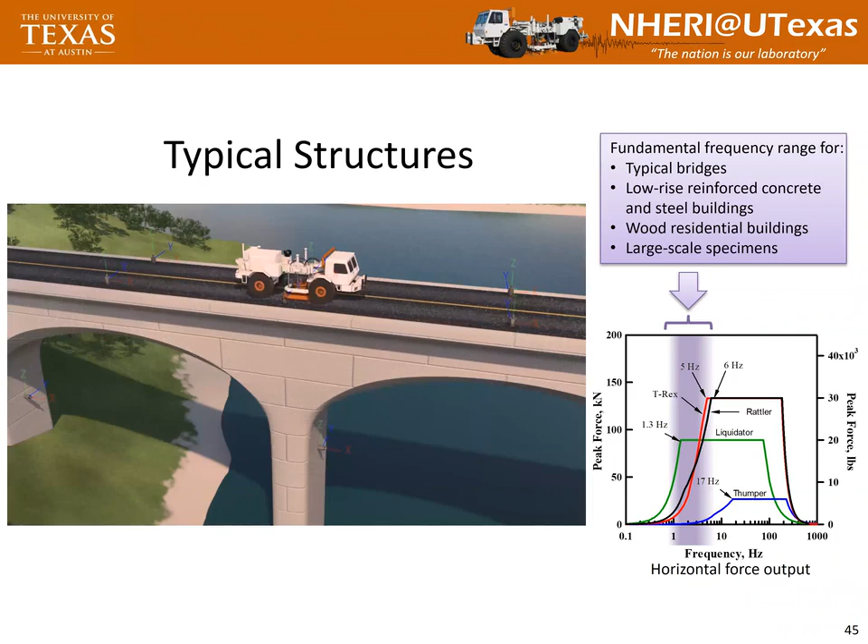And that's what we still think, and that's what that illustrates. With Liquidator it can even go lower. And we could, for the appropriate project, try to orient it horizontally. We'd be happy to do that and see if we can't excite at very low frequencies. To us that means 0.6 hertz or something.

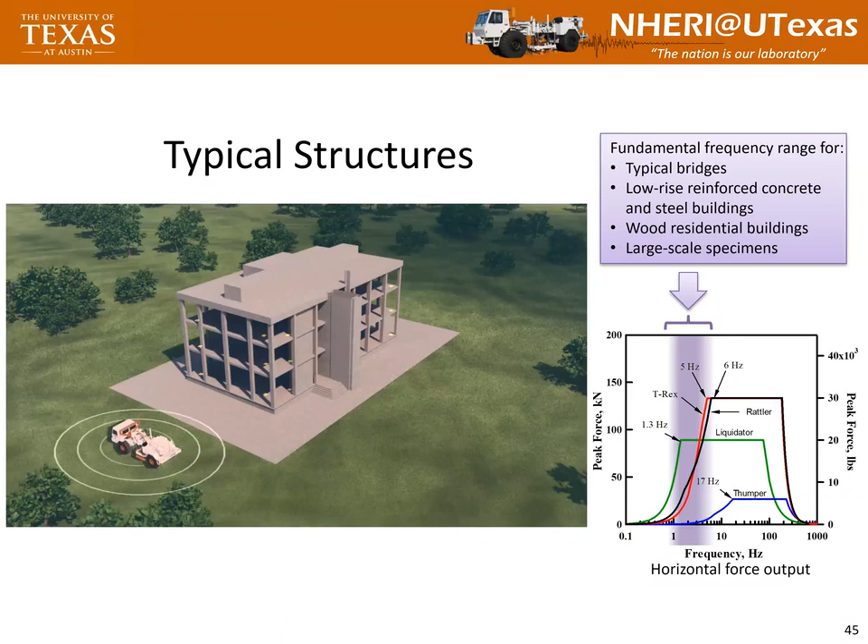That was before any NEES, and that was a bridge being decommissioned in Texas, and we put the RDD on it. I was standing down here, literally, looking at it, and this was just vertical because that's all it could do. And the column was doing this, I mean it was moving this much. And I said, Stokoe, a bridge falling on Stokoe, this would make big news, but I don't want to. I got out, I chickened out because it was a bit frightening to see how much motion.

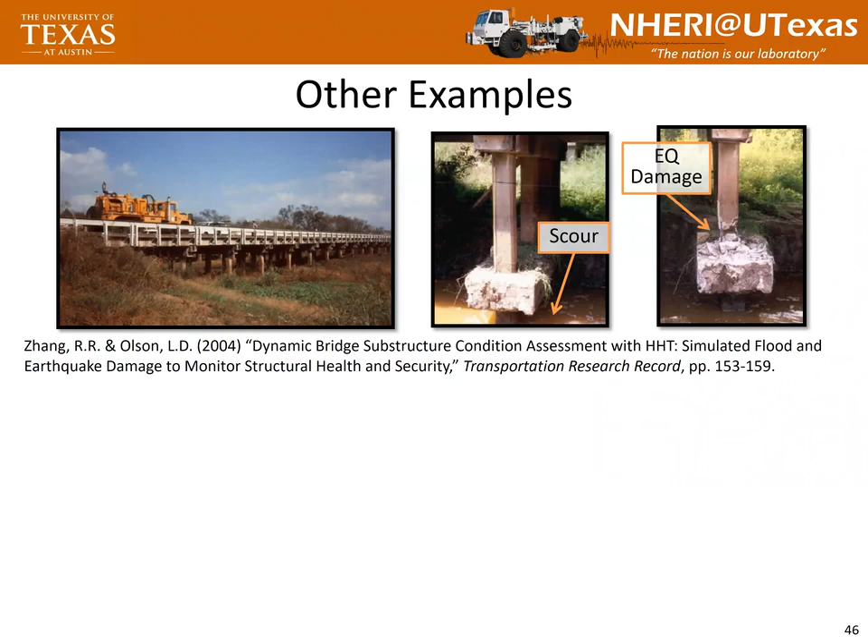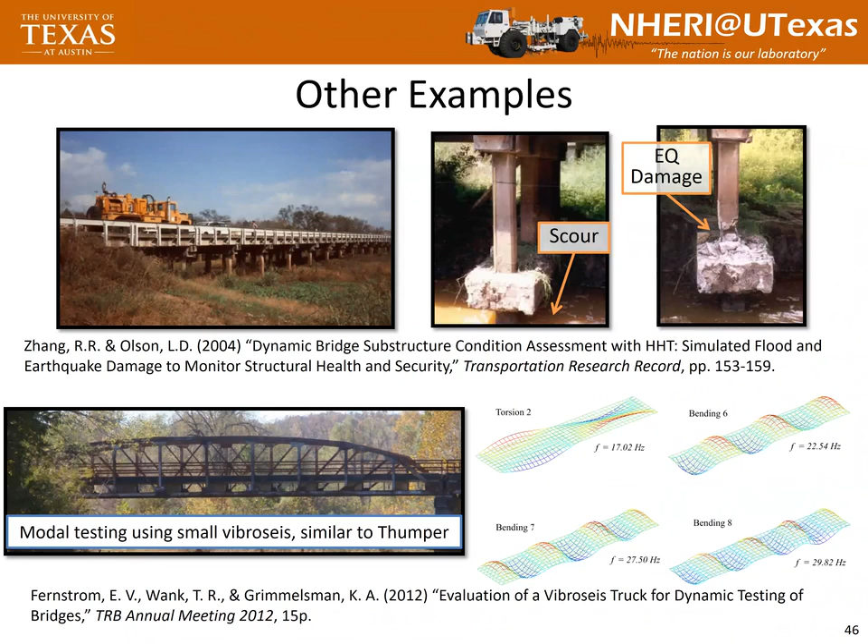I don't know all these, these are just... Mung, do you want to say anything? Yeah, just to tell you that you can put your own sensor. If you try the post, you can put your own sensor, or you can process from our sensors. We don't have all the sensors, we don't have those kind of strain gauges and stuff like that. You probably have to use your own in that case.

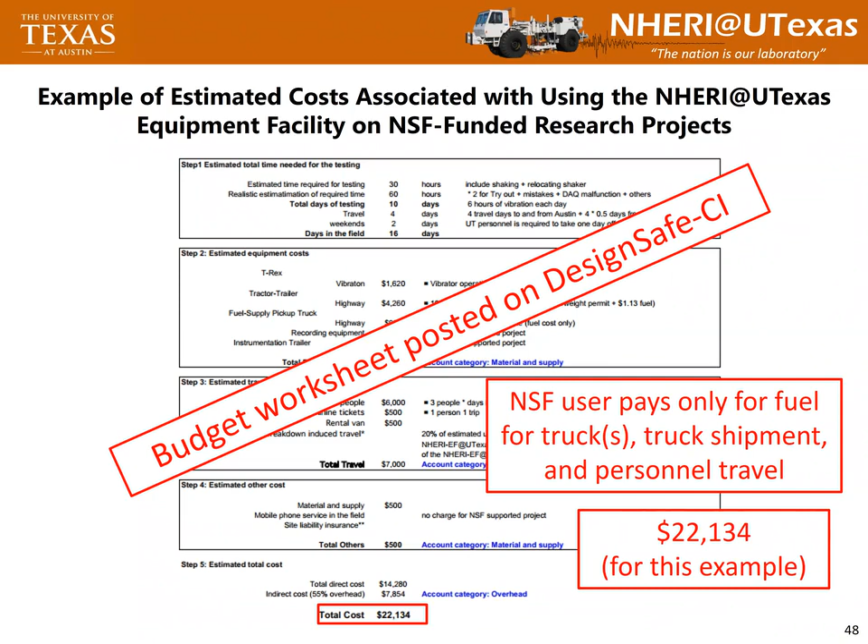Okay, next, so this is on our web page, this is probably real, I mean on the web page right now, and it just shows you this. We won't worry about all the details, but if you had NSF, that's what it would cost you. That's what it would cost you if you did it without NSF. So NSF is giving you a lot of support, whether everything is, it's all there for you to see.

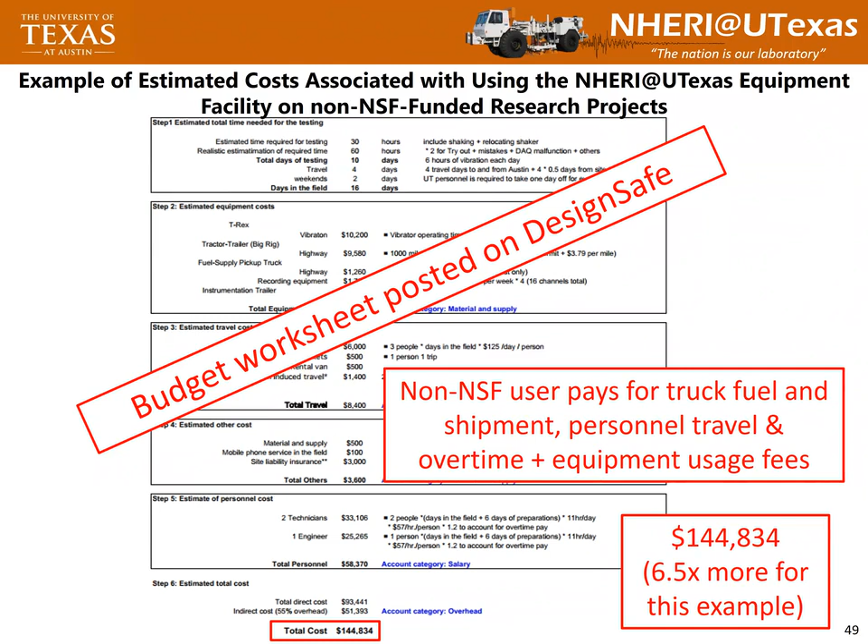We'll answer any questions that you want. The overhead is now 56.5, it does minor, but we're trying to help you estimate your project. So you can contact any of us, that is Rathje's, it's in DesignSafe, that's where all the data resides. And we thank you for your hospitality, the University of Florida.